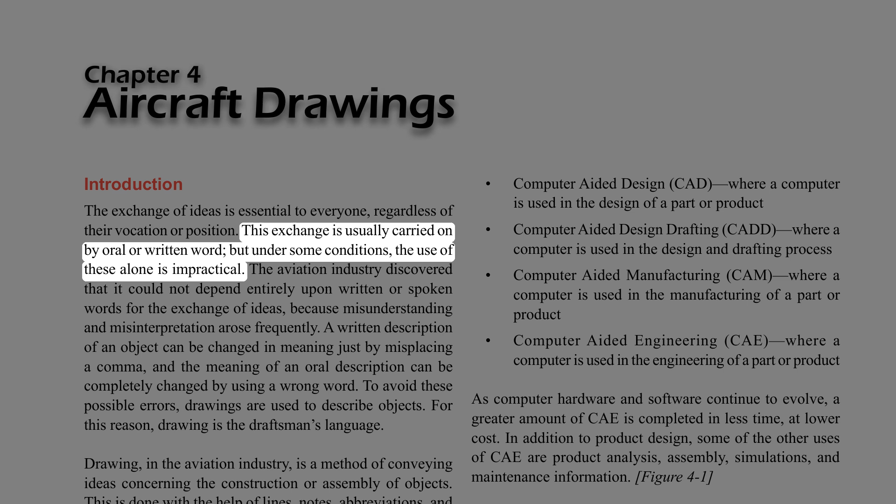Chapter 4: Aircraft Drawings. Introduction. The exchange of ideas is essential to everyone, regardless of their vocation or position. This exchange is usually carried on by oral or written word, but under some conditions, the use of these alone is impractical. The aviation industry discovered that it could not depend entirely upon written or spoken words for the exchange of ideas, because misunderstanding and misinterpretation arose frequently.

A written description of an object can be changed in meaning just by misplacing a comma, and the meaning of an oral description can be completely changed by using a wrong word. To avoid these possible errors, drawings are used to describe objects. For this reason, drawing is the draftsman's language.

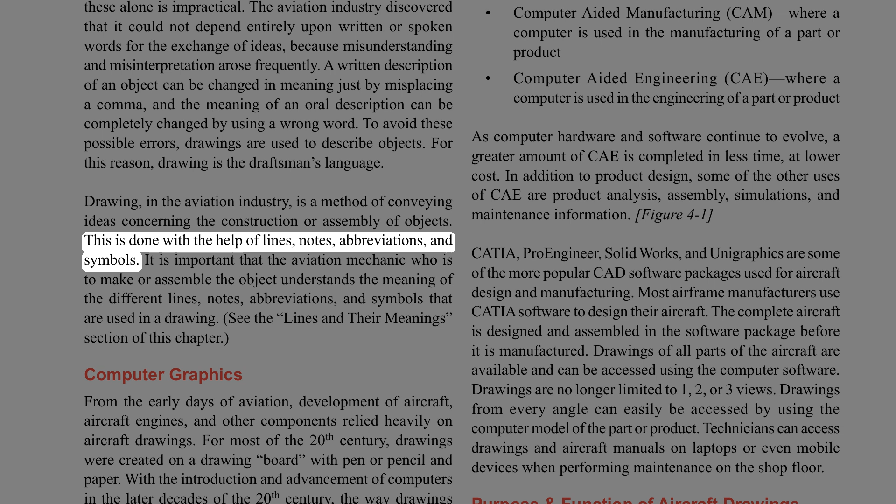Drawing, in the aviation industry, is a method of conveying ideas concerning the construction or assembly of objects. This is done with the help of lines, notes, abbreviations, and symbols. It is important that the aviation mechanic who is to make or assemble the object understands the meaning of the different lines, notes, abbreviations, and symbols that are used in a drawing. See the lines and their meanings section of this chapter.

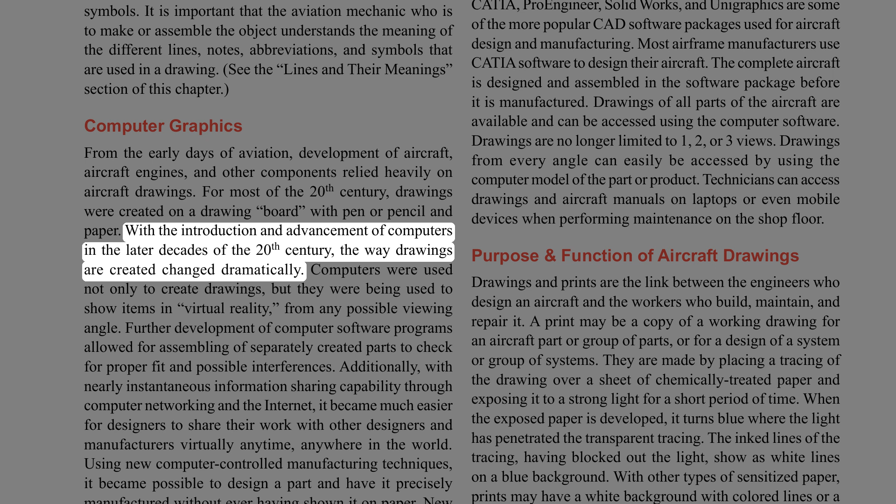Computer graphics. From the early days of aviation, development of aircraft, engines, and other components relied heavily on aircraft drawings. For most of the 20th century, drawings were created on a drawing board with pen or pencil and paper. With the introduction and advancement of computers in the later decades of the 20th century, the way drawings are created changed dramatically. Computers were used not only to create drawings, but they were being used to show items in virtual reality from any possible viewing angle.

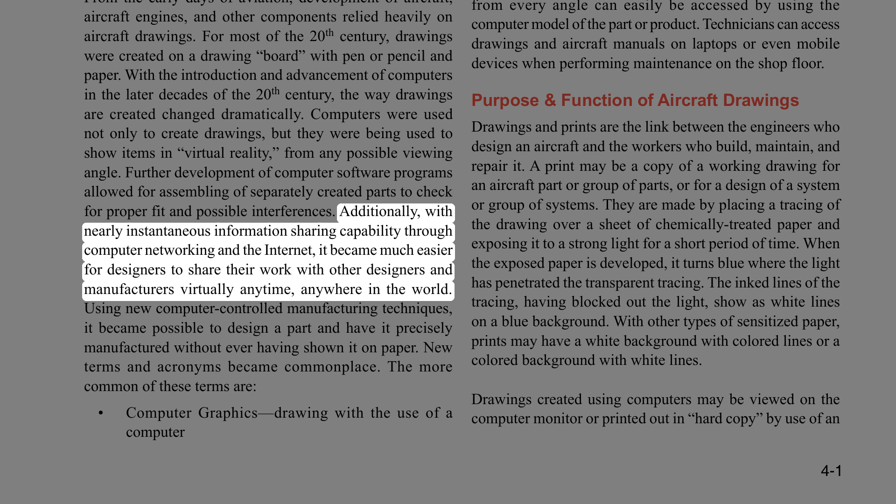Further development of computer software programs allowed for assembling of separately created parts to check for proper fit and possible interferences. Additionally, with nearly instantaneous information sharing capability through computer networking and the internet, it became much easier for designers to share their work with other designers and manufacturers virtually anytime, anywhere in the world. Using new computer-controlled manufacturing techniques, it became possible to design a part and have it precisely manufactured without ever having shown it on paper. New terms and acronyms became commonplace.

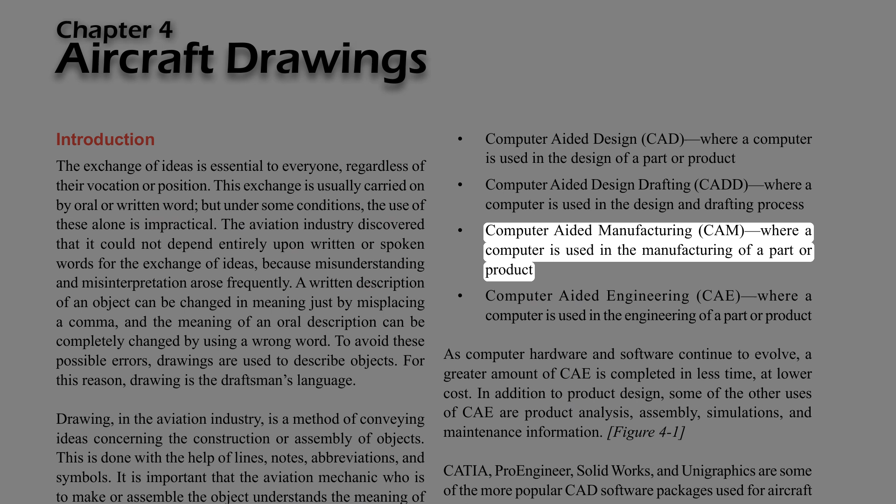The more common of these terms are computer graphics, drawing with the use of a computer; computer-aided design, CAD, where a computer is used in the design of a part or product; computer-aided design drafting, CADD, where a computer is used in the design and drafting process; computer-aided manufacturing, CAM, where a computer is used in the manufacturing of a part or product; computer-aided engineering, CAE, where a computer is used in the engineering of a part or product.

As computer hardware and software continue to evolve, a greater amount of CAE is completed in less time, at lower cost. In addition to product design, some of the other uses of CAE are product analysis, assembly, simulations, and maintenance information. CATIA, Pro Engineer, SolidWorks, and Unigraphics are some of the more popular CAD software packages used for aircraft design and manufacturing. Most airframe manufacturers use CATIA software to design their aircraft. The complete aircraft is designed and assembled in the software package before it is manufactured.

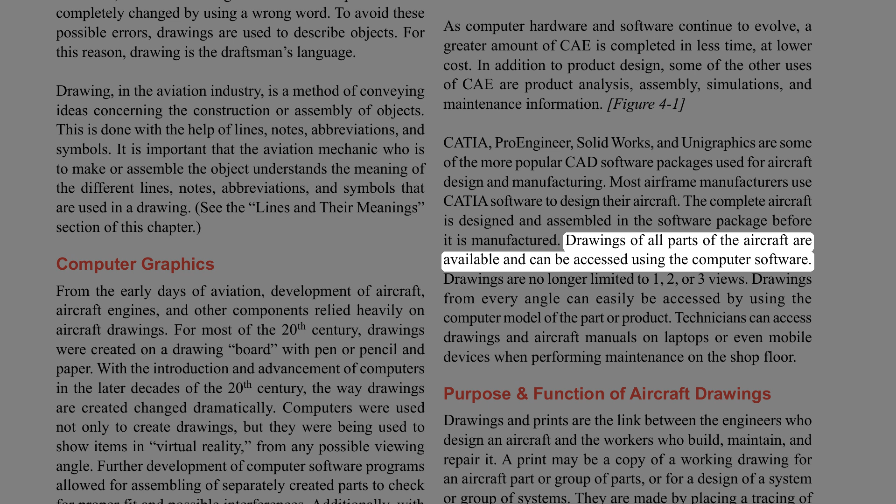Drawings of all parts of the aircraft are available and can be accessed using the computer software. Drawings are no longer limited to 1, 2, or 3 views. Drawings from every angle can easily be accessed by using the computer model of the part or product. Technicians can access drawings and aircraft manuals on laptops or even mobile devices when performing maintenance on the shop floor.

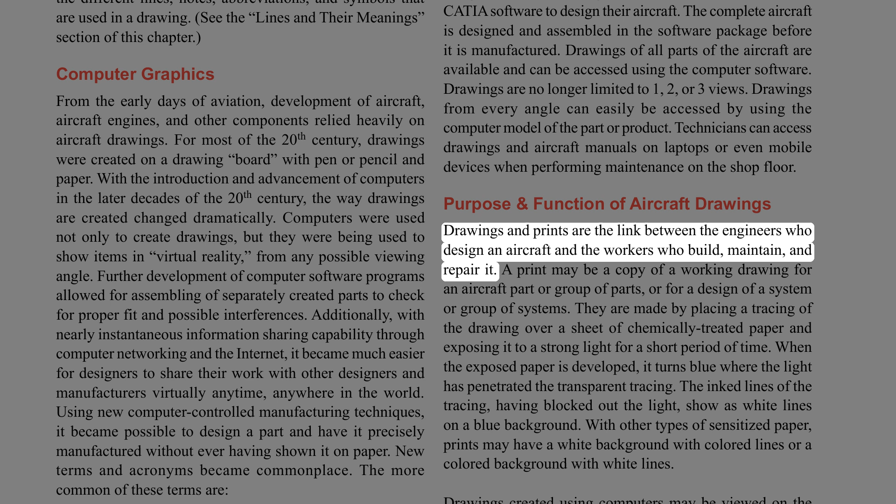Purpose and function of aircraft drawings. Drawings and prints are the link between the engineers who design an aircraft and the workers who build, maintain, and repair it. A print may be a copy of a working drawing for an aircraft part or group of parts, or for a design of a system or group of systems. They are made by placing a tracing of the drawing over a sheet of chemically treated paper and exposing it to a strong light for a short period of time.

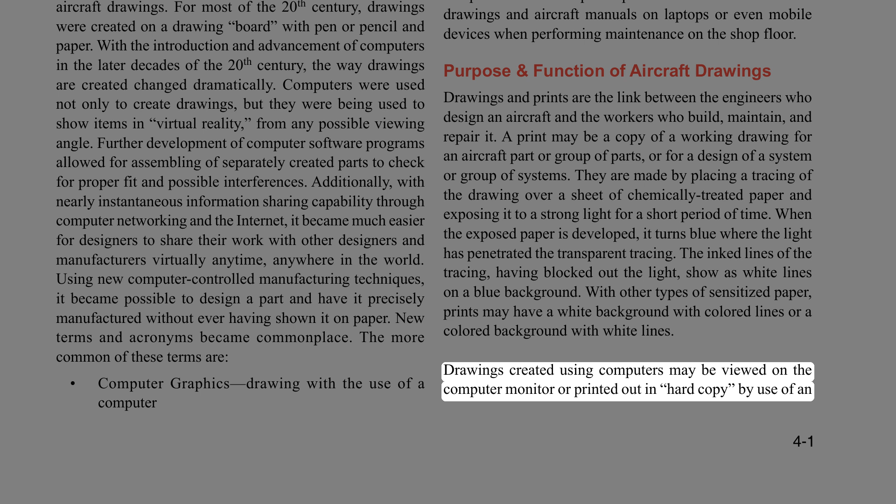When the exposed paper is developed, it turns blue where the light has penetrated the transparent tracing. The inked lines of the tracing, having blocked out the light, show as white lines on a blue background. With other types of sensitized paper, prints may have a white background with colored lines or a colored background with white lines. Drawings created using computers may be viewed on the computer monitor or printed out in hard copy by use of an inkjet or laser printer.

Larger drawings may be printed by use of a plotter or large format printer. Large printers can print drawings up to 42 inches high with widths up to 600 inches by use of continuous roll paper. Care and use of drawings. Drawings should be handled carefully as they are both expensive and valuable. Open drawings slowly and carefully to prevent tearing of the paper. When the drawing is open, smooth out the fold lines instead of bending them backward.

To protect drawings from damage, never spread them on the floor or lay them on a surface covered with tools or other objects that may make holes in the paper. Hands should be free of oil, grease, or other unclean matter that can soil or smudge the print. Never make notes or marks on a print, as they may confuse others and lead to incorrect work.

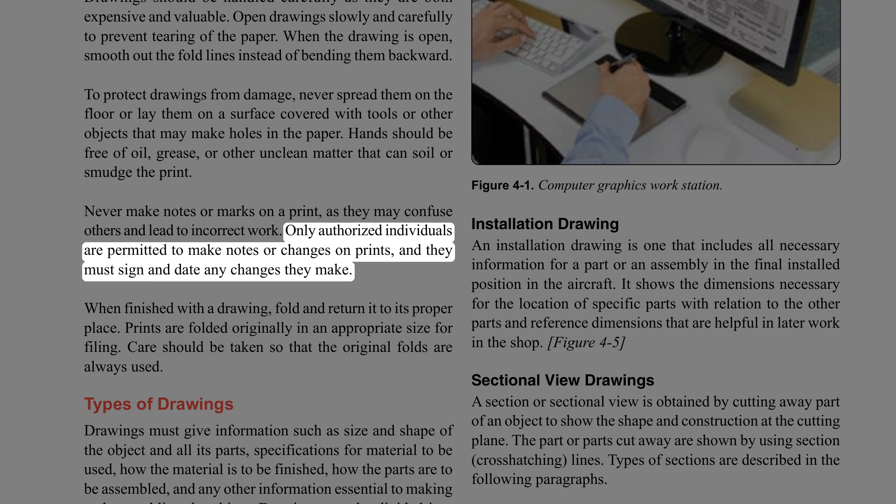Only authorized individuals are permitted to make notes or changes on prints, and they must sign and date any changes they make. When finished with a drawing, fold and return it to its proper place. Prints are folded originally in an appropriate size for filing. Care should be taken so that the original folds are always used.

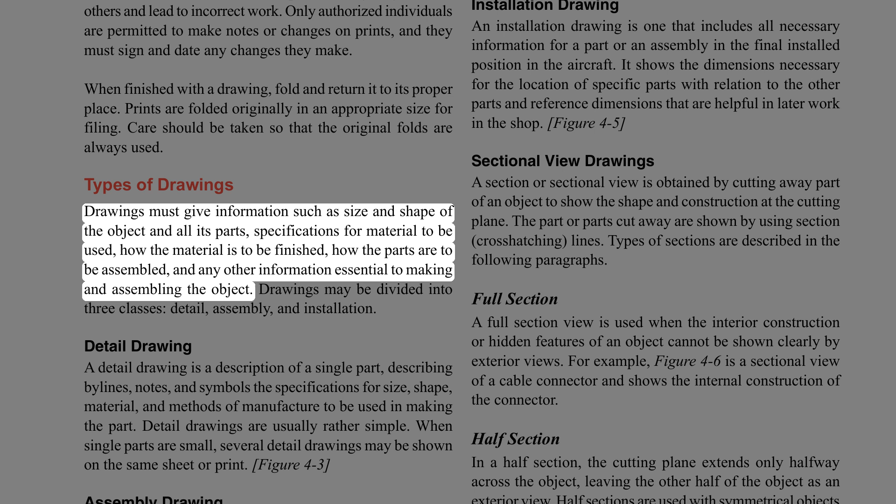Types of drawings. Drawings must give information such as size and shape of the object and all its parts, specifications for material to be used, how the material is to be finished, how the parts are to be assembled, and any other information essential to making and assembling the object. Drawings may be divided into 3 classes: detail, assembly, and installation.

Detail drawing. A detail drawing is a description of a single part, describing by lines, notes, and symbols the specifications for size, shape, material, and methods of manufacture to be used in making the part. Detail drawings are usually rather simple. When single parts are small, several detail drawings may be shown on the same sheet or print.

Assembly drawing. An assembly drawing is a description of an object made up of 2 or more parts. It describes the object's size and shape. Its primary purpose is to show the relationship of the various parts. An assembly drawing is usually more complex than a detail drawing and is often accompanied by detail drawings of various parts.

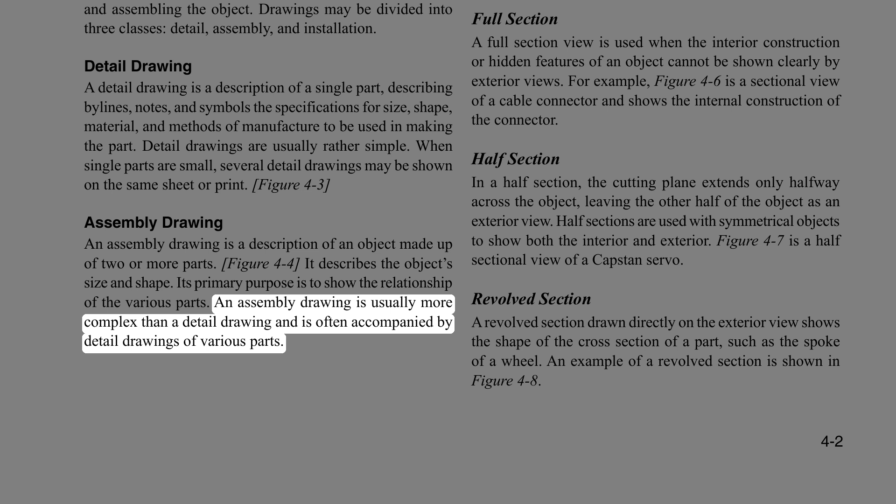Installation drawing. An installation drawing is one that includes all necessary information for a part or an assembly in the final installed position in the aircraft. It shows the dimensions necessary for the location of specific parts with relation to the other parts and reference dimensions that are helpful in later work in the shop.

Sectional view drawings. A section or sectional view is obtained by cutting away part of an object to show the shape and construction at the cutting plane. The part or parts cut away are shown by using section (crosshatching) lines. Types of sections are described in the following paragraphs.

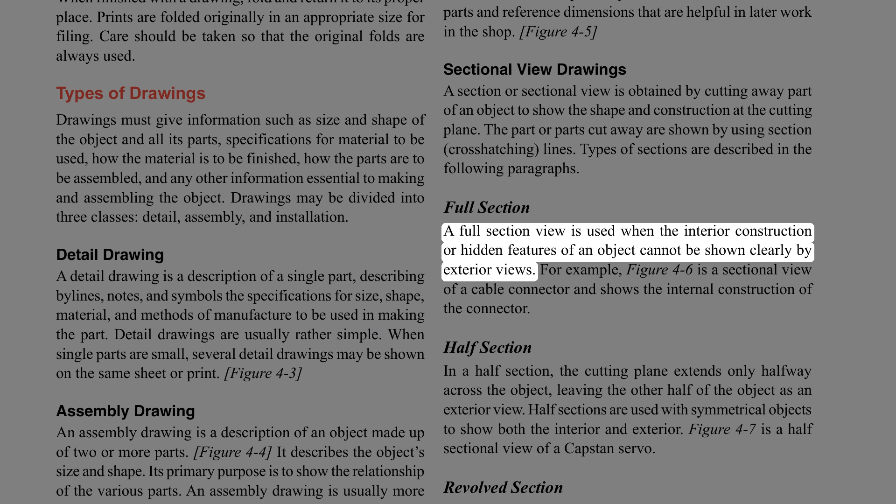Full section. A full section view is used when the interior construction or hidden features of an object cannot be shown clearly by exterior views. For example, Figure 4-6 is a sectional view of a cable connector and shows the internal construction of the connector.

Half section. In a half section, the cutting plane extends only halfway across the object, leaving the other half of the object as an exterior view. Half sections are used with symmetrical objects to show both the interior and exterior. Figure 4-7 is a half-sectional view of a capstan servo.

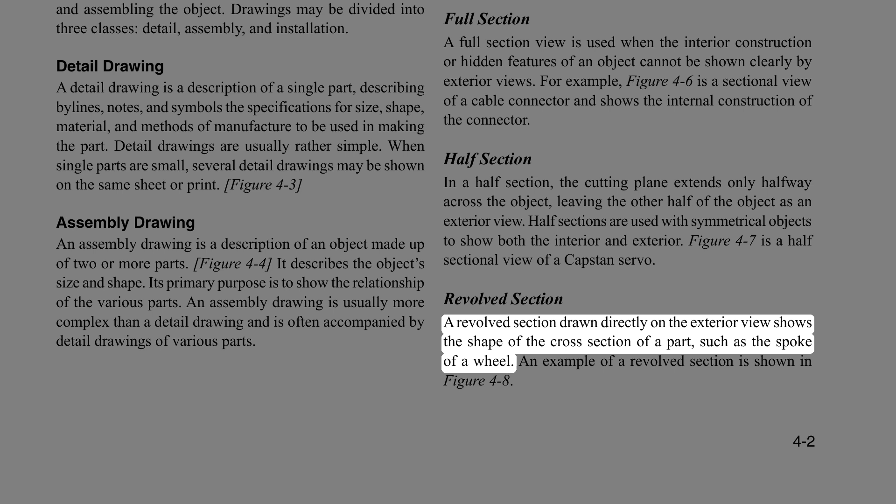Revolved section. A revolved section drawn directly on the exterior view shows the shape of the cross-section of a part, such as the spoke of a wheel. An example of a revolved section is shown in Figure 4-8. Removed section. A removed section illustrates parts of an object. It is drawn like revolved sections, except it is placed at one side and often drawn to a larger scale than the view indicated to bring out pertinent details.

Figure 4-9 is an illustration of removed sections. Section AA shows the cross-sectional shape of the object at cutting plane line AA. Section BB shows the cross-sectional shape at cutting plane line BB. These sectional views are drawn to the same scale as the principal view.

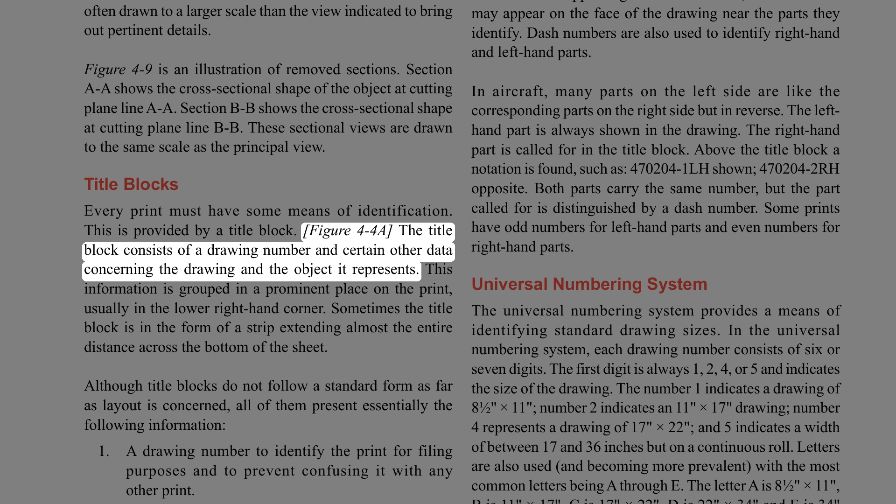Title blocks. Every print must have some means of identification. This is provided by a title block, Figure 4-4A. The title block consists of a drawing number and certain other data concerning the drawing and the object it represents. This information is grouped in a prominent place on the print, usually in the lower right-hand corner.

Sometimes the title block is in the form of a strip extending almost the entire distance across the bottom of the sheet. Although title blocks do not follow a standard form as far as layout is concerned, all of them present essentially the following information. A drawing number to identify the print for filing purposes and to prevent confusing it with any other print. The name of the part or assembly. The drawing scale. The date. The name of the firm. The name of the draftsman, the checker, and the person approving the drawing.

Drawing or print numbers. All prints are identified by a number that appears in a number block in the lower right corner of the title block. It may also be shown in other places, such as near the top borderline, in the upper right corner, or on the reverse side of the print at both ends, so that the number shows when the print is folded or rolled. The purpose of the number is quick identification of a print.

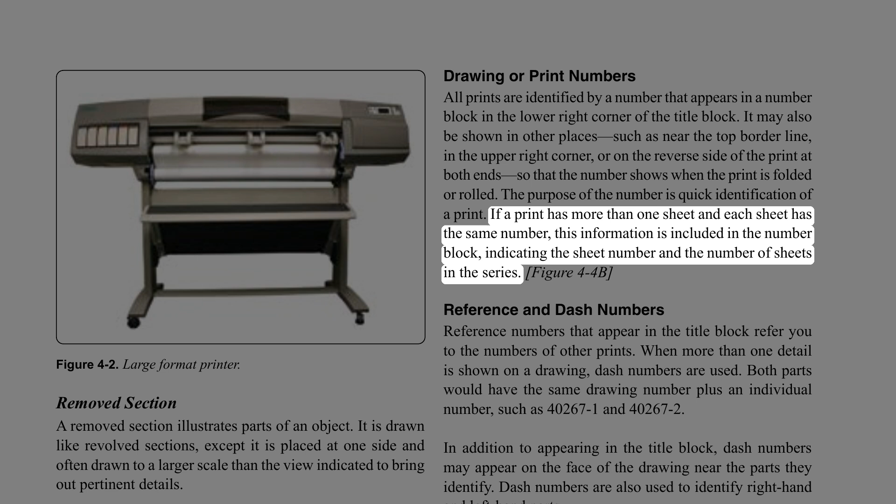If a print has more than one sheet and each sheet has the same number, this information is included in the number block, indicating the sheet number and the number of sheets in the series, Figure 4-4B. Reference and dash numbers. Reference numbers that appear in the title block refer you to the numbers of other prints. When more than one detail is shown on a drawing, dash numbers are used.

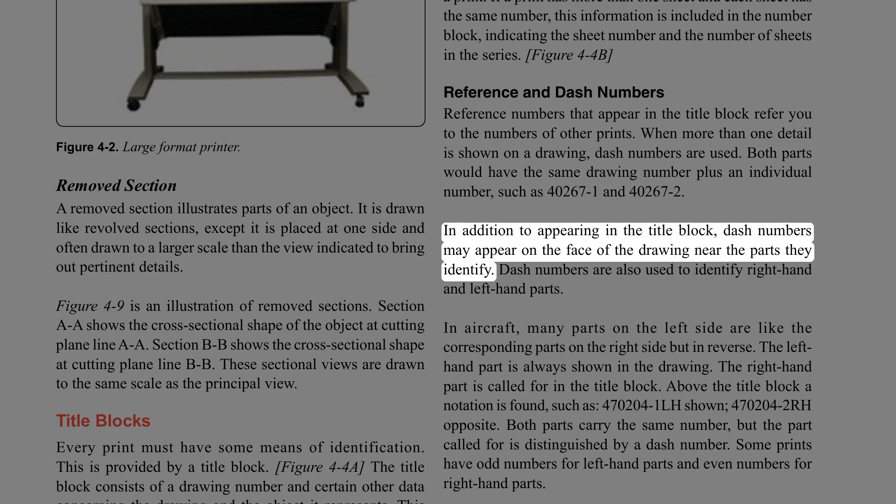Both parts would have the same drawing number plus an individual number, such as 40,267-1 and 40,267-2. In addition to appearing in the title block, dash numbers may appear on the face of the drawing near the parts they identify. Dash numbers are also used to identify right-hand and left-hand parts.

In aircraft, many parts on the left side are like the corresponding parts on the right side but in reverse. The left-hand part is always shown in the drawing. The right-hand part is called for in the title block. Above the title block a notation is found, such as 470,204-1 LH shown, 470,204-2 RH opposite. Both parts carry the same number, but the part called for is distinguished by a dash number. Some prints have odd numbers for left-hand parts and even numbers for right-hand parts.

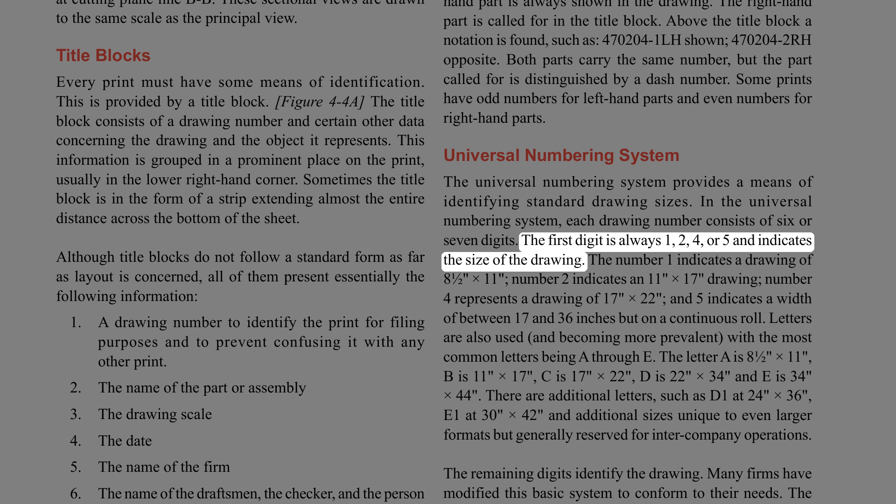Universal Numbering System. The Universal Numbering System provides a means of identifying standard drawing sizes. In the Universal Numbering System, each drawing number consists of 6 or 7 digits. The first digit is always 1, 2, 4, or 5 and indicates the size of the drawing. The number 1 indicates a drawing of 8.5 by 11 inches. Number 2 indicates an 11 by 17 inch drawing. Number 4 represents a drawing of 17 by 22 inches, and 5 indicates a width of between 17 and 36 inches but on a continuous roll.

Letters are also used, and becoming more prevalent, with the most common letters being A through E. The letter A is 8.5 by 11, B is 11 by 17 inches, C is 17 by 22 inches, D is 22 by 34, and E is 34 by 44. There are additional letters, such as D1 at 24 by 36 inches, E1 at 30 by 42 inches, and additional sizes unique to even larger formats but generally reserved for intercompany operations. The remaining digits identify the drawing.

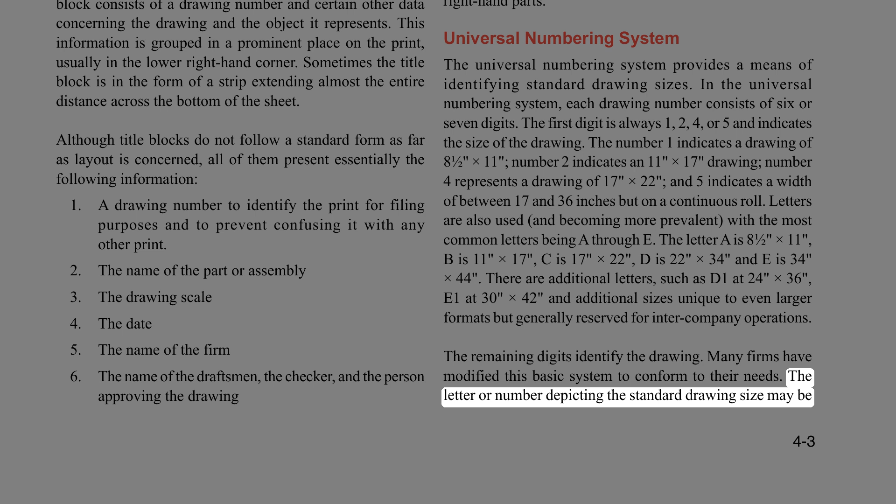Many firms have modified this basic system to conform to their needs. The letter or number depicting the standard drawing size may be prefixed to the number, separated from it by a dash (Figure 4-3, Detail Drawing; Figure 4-4, Assembly Drawing; Figure 4-5, Installation Drawing). Other numbering systems provide a separate box preceding the drawing number for the drawing size identifier. In another modification of this system, the part number of the depicted assembly is assigned as the drawing number.

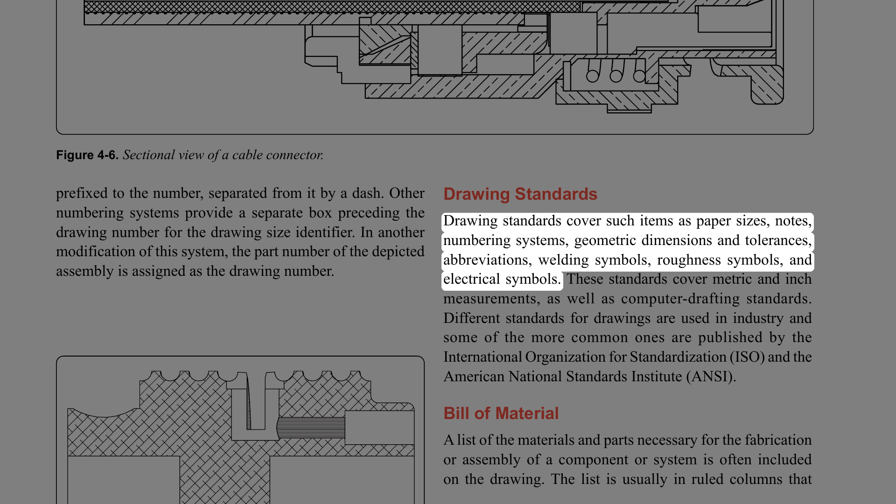Drawing standards. Drawing standards cover such items as paper sizes, notes, numbering systems, geometric dimensions and tolerances, abbreviations, welding symbols, roughness symbols, and electrical symbols. These standards cover metric and inch measurements, as well as computer drafting standards. Different standards for drawings are used in industry, and some of the more common ones are published by the International Organization for Standardization, ISO, and the American National Standards Institute, ANSI.

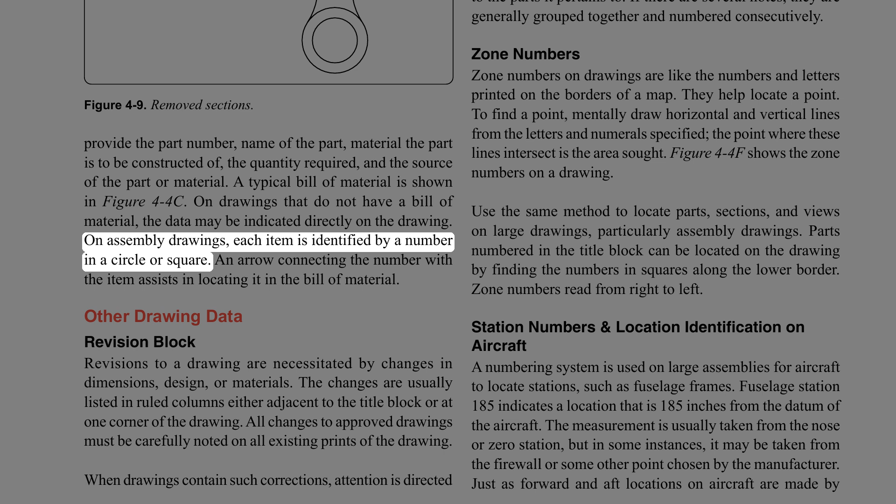Bill of Material. A list of the materials and parts necessary for the fabrication or assembly of a component or system is often included on the drawing. The list is usually in ruled columns that provide the part number, name of the part, material the part is to be constructed of, the quantity required, and the source of the part or material. A typical bill of material is shown in Figure 4-4c. On drawings that do not have a bill of material, the data may be indicated directly on the drawing. On assembly drawings, each item is identified by a number in a circle or square. An arrow connecting the number with the item assists in locating it in the bill of material.

Other drawing data: revision block. Revisions to a drawing are necessitated by changes in dimensions, design, or materials. The changes are usually listed in ruled columns either adjacent to the title block or at one corner of the drawing. All changes to approved drawings must be carefully noted on all existing prints of the drawing. When drawings contain such corrections, attention is directed to the changes by lettering or numbering them and listing those changes against the symbol in a revision block.

Figure 4-4d. The revision block contains the identification symbol, the date, the nature of the revision, the authority for the change, and the name of the draftsman who made the change. To distinguish the corrected drawing from its previous version, many firms are including, as part of the title block, a space for entering the appropriate symbol to designate that the drawing has been changed or revised.

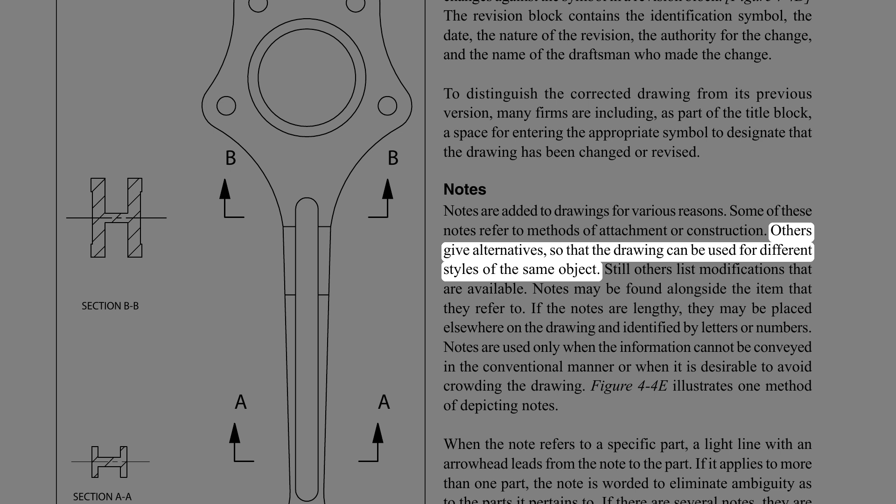Notes. Notes are added to drawings for various reasons. Some of these notes refer to methods of attachment or construction. Others give alternatives, so that the drawing can be used for different styles of the same object. Still others list modifications that are available. Notes may be found alongside the item that they refer to. If the notes are lengthy, they may be placed elsewhere on the drawing and identified by letters or numbers.

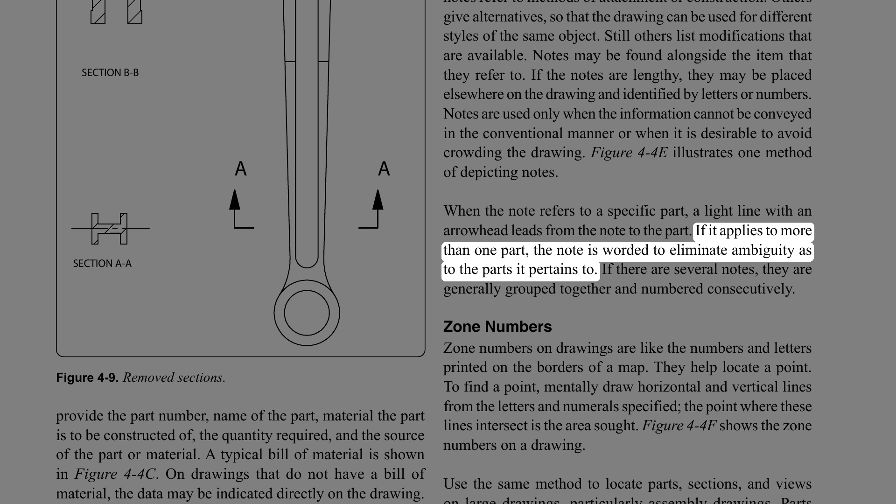Notes are used only when the information cannot be conveyed in the conventional manner or when it is desirable to avoid crowding the drawing. Figure 4-4e illustrates one method of depicting notes. When the note refers to a specific part, a light line with an arrowhead leads from the note to the part. If it applies to more than one part, the note is worded to eliminate ambiguity as to the parts it pertains to. If there are several notes, they are generally grouped together and numbered consecutively.

Zone numbers. Zone numbers on drawings are like the numbers and letters printed on the borders of a map. They help locate a point. To find a point, mentally draw horizontal and vertical lines from the letters and numerals specified. The point where these lines intersect is the area sought. Figure 4-4f shows the zone numbers on a drawing.

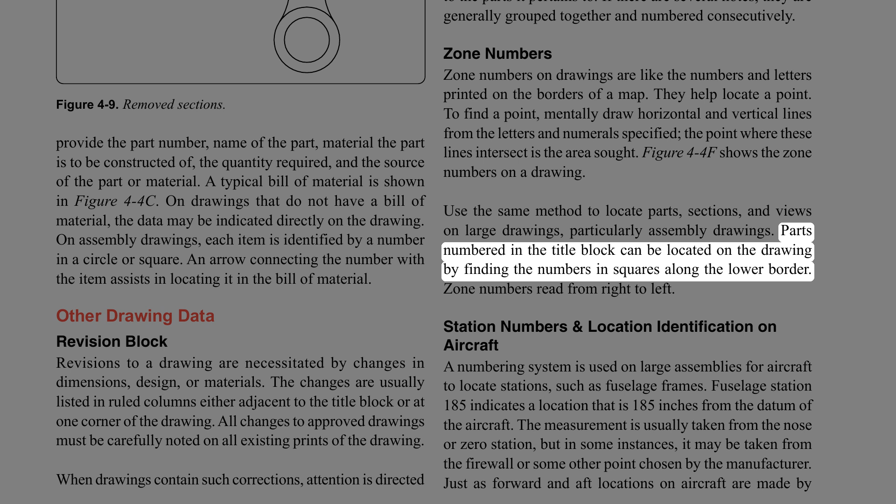Use the same method to locate parts, sections, and views on large drawings, particularly assembly drawings. Parts numbered in the title block can be located on the drawing by finding the numbers in squares along the lower border. Zone numbers read from right to left.

Station numbers and location identification on aircraft. A numbering system is used on large assemblies for aircraft to locate stations, such as fuselage frames. Fuselage station 185 indicates a location that is 185 inches from the datum of the aircraft. The measurement is usually taken from the nose or zero station, but in some instances, it may be taken from the firewall or some other point chosen by the manufacturer.

Just as forward and aft locations on aircraft are made by reference to the datum, locations left and right of the aircraft's longitudinal axis are made by reference to the buttock line and are called butt stations. Vertical locations on aircraft are made in reference to the waterline. The same station numbering system is used for wing and stabilizer frames. The measurement is taken from the centerline or zero station of the aircraft. Figure 4-10 shows use of the fuselage stations, FS, waterline locations, WL, and left and right buttock line locations, RBL and LBL.

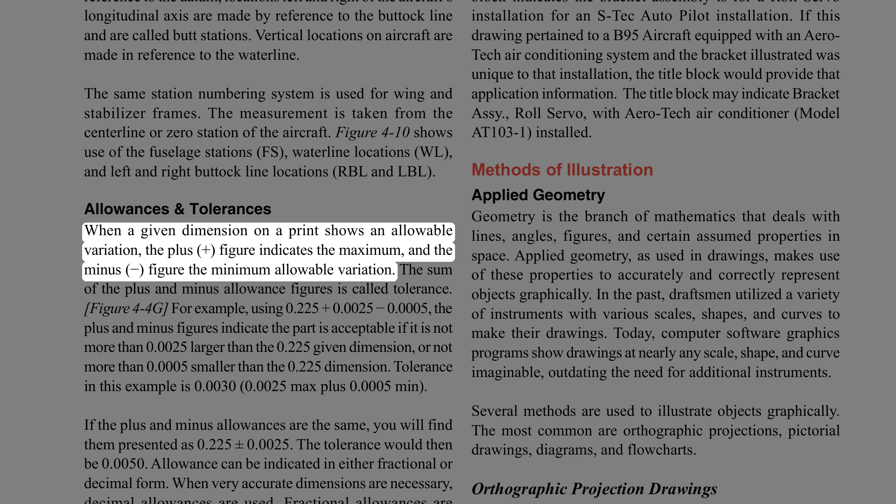Allowances and tolerances. When a given dimension on a print shows an allowable variation, the plus figure indicates the maximum, and the minus figure the minimum allowable variation. The sum of the plus and minus allowance figures is called tolerance.

In Figure 4-4g, for example, using 0.225 plus 0.0025 minus 0.0005, the plus and minus figures indicate the part is acceptable if it is not more than 0.0025 larger than the 0.225 given dimension, or not more than 0.0005 smaller than the 0.225 dimension. Tolerance in this example is 0.0030, 0.0025 max plus 0.0005 min.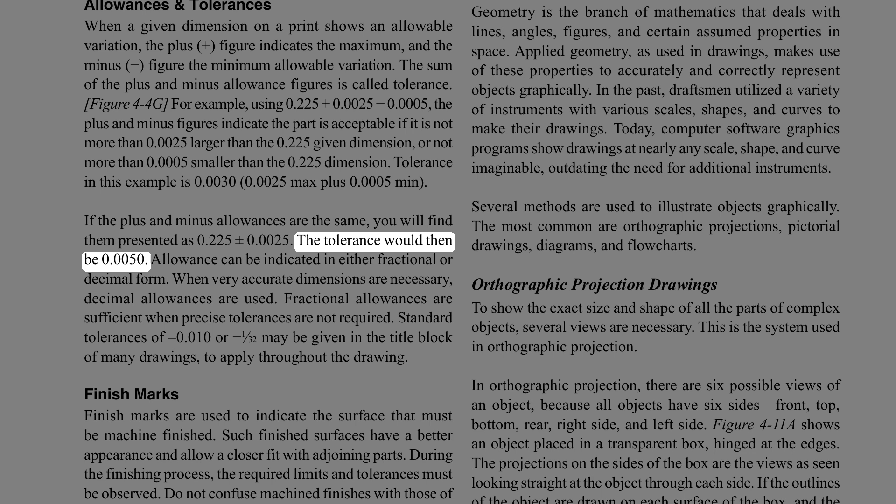If the plus and minus allowances are the same, you will find them presented as 0.225 plus or minus 0.0025. The tolerance would then be 0.0050. Allowance can be indicated in either fractional or decimal form. When very accurate dimensions are necessary, decimal allowances are used. Fractional allowances are sufficient when precise tolerances are not required. Standard tolerances of minus 0.010 or minus 1/32 may be given in the title block of many drawings, to apply throughout the drawing.

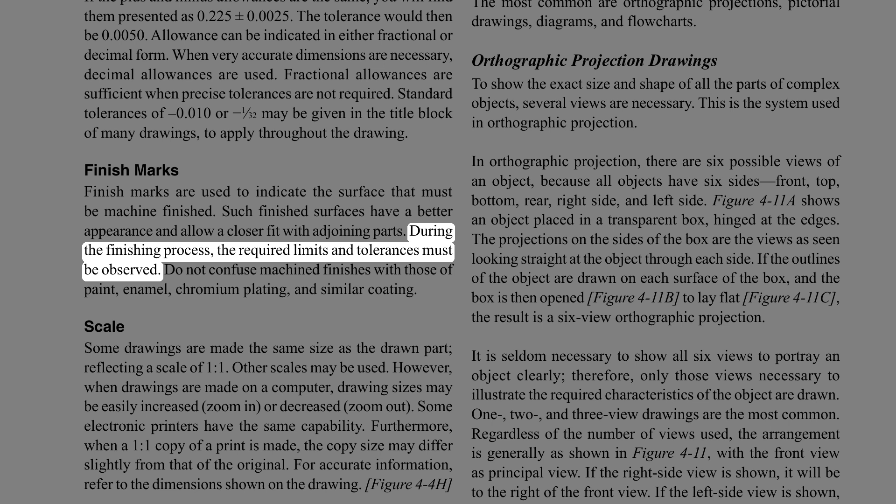Finish marks. Finish marks are used to indicate the surface that must be machine finished. Such finished surfaces have a better appearance and allow a closer fit with adjoining parts. During the finishing process, the required limits and tolerances must be observed. Do not confuse machined finishes with those of paint, enamel, chromium plating, and similar coating.

Scale. Some drawings are made the same size as the drawn part, reflecting a scale of 1:1. Other scales may be used. However, when drawings are made on a computer, drawing sizes may be easily increased, zoom in, or decreased, zoom out. Some electronic printers have the same capability. Furthermore, when a 1:1 copy of a print is made, the copy size may differ slightly from that of the original. For accurate information, refer to the dimensions shown on the drawing.

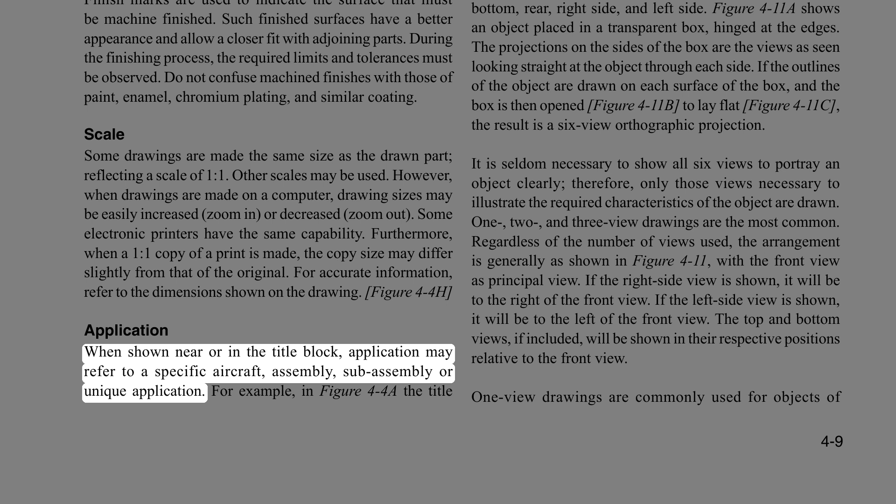Figure 4-4h. Application. When shown near or in the title block, application may refer to a specific aircraft, assembly, sub-assembly, or unique application. For example, in Figure 4-4a, the title block indicates the bracket assembly is for roll servo installation for an S-Tec autopilot installation.

If this drawing pertained to a B-95 aircraft equipped with an Aero-Tech air conditioning system and the bracket illustrated was unique to that installation, the title block would provide that application information. The title block may indicate bracket Assy., roll servo, with Aero-Tech air conditioner, model AT103-1, installed.

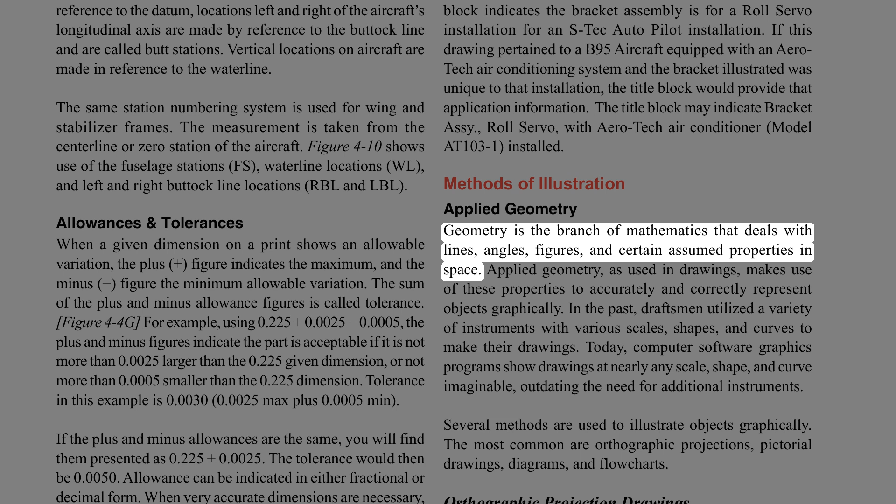Methods of illustration. Applied geometry. Geometry is the branch of mathematics that deals with lines, angles, figures, and certain assumed properties in space. Applied geometry, as used in drawings, makes use of these properties to accurately and correctly represent objects graphically.

In the past, draftsmen utilized a variety of instruments with various scales, shapes, and curves to make their drawings. Today, computer software graphics programs show drawings at nearly any scale, shape, and curve imaginable, outdating the need for additional instruments. Several methods are used to illustrate objects graphically. The most common are orthographic projections, pictorial drawings, diagrams, and flowcharts.

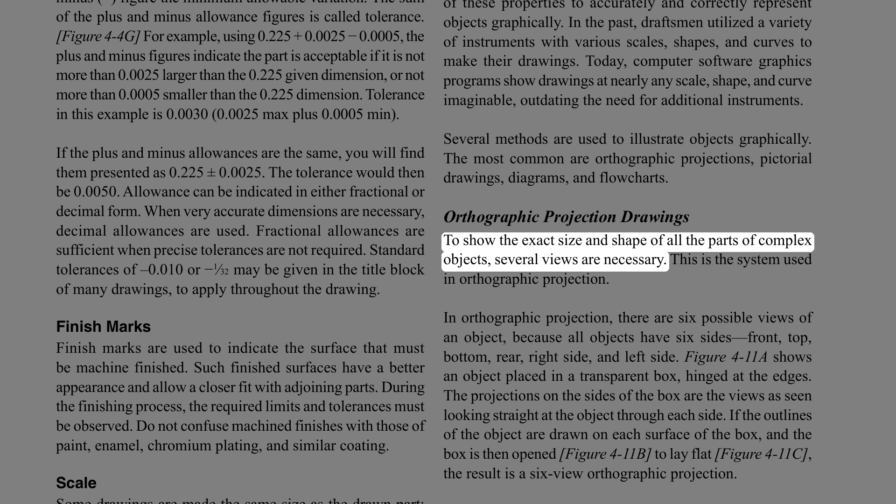Orthographic projection drawings. To show the exact size and shape of all the parts of complex objects, several views are necessary. This is the system used in orthographic projection. In orthographic projection, there are 6 possible views of an object, because all objects have 6 sides: front, top, bottom, rear, right side, and left side.

Figure 4-11a shows an object placed in a transparent box, hinged at the edges. The projections on the sides of the box are the views as seen looking straight at the object through each side. If the outlines of the object are drawn on each surface of the box, and the box is then opened, figure 4-11b, to lay flat, figure 4-11c, the result is a 6-view orthographic projection.

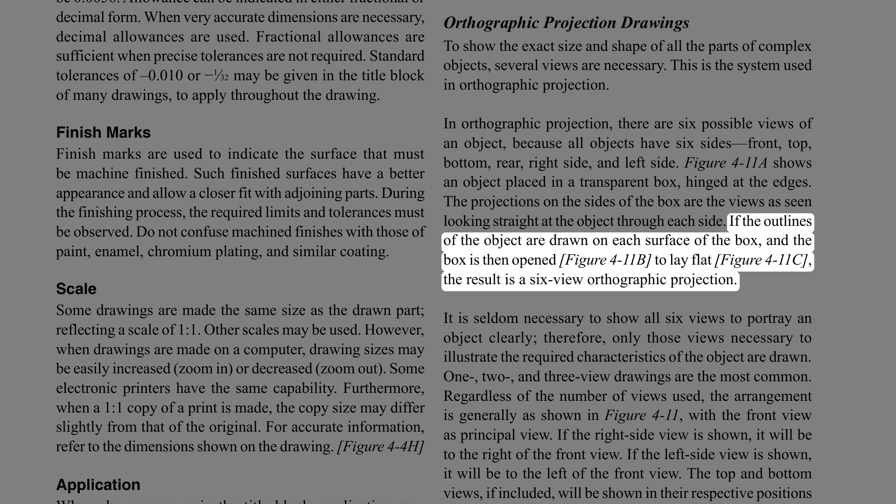It is seldom necessary to show all 6 views to portray an object clearly. Therefore, only those views necessary to illustrate the required characteristics of the object are drawn. 1, 2, and 3 view drawings are the most common. Regardless of the number of views used, the arrangement is generally as shown in figure 4-11, with the front view as principal view.

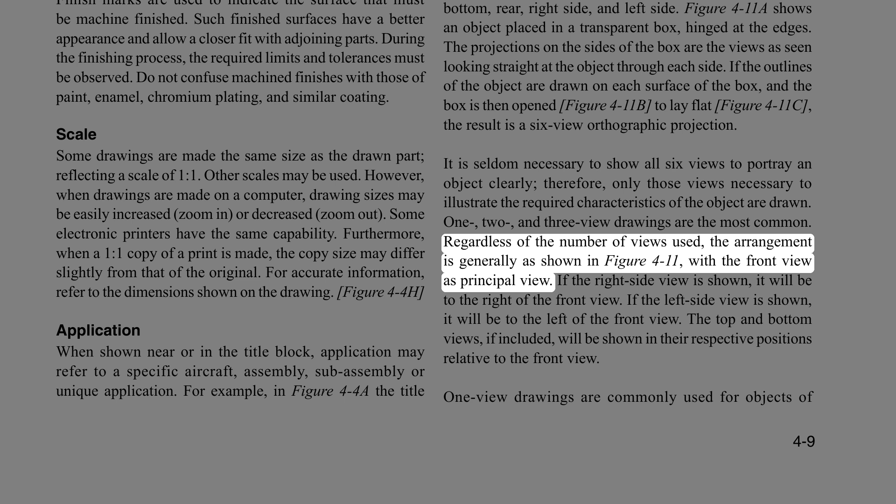If the right side view is shown, it will be to the right of the front view. If the left side view is shown, it will be to the left of the front view. The top and bottom views, if included, will be shown in their respective positions relative to the front view.

One-view drawings are commonly used for objects of uniform thickness, such as gaskets, shims, and plates. A dimensional note gives the thickness as shown in figure 4-12. One-view drawings are also commonly used for cylindrical, spherical, or square parts if all the necessary dimensions can be properly shown in one view. When space is limited and 2 views must be shown, symmetrical objects are often represented by half views, as illustrated in figure 4-13.

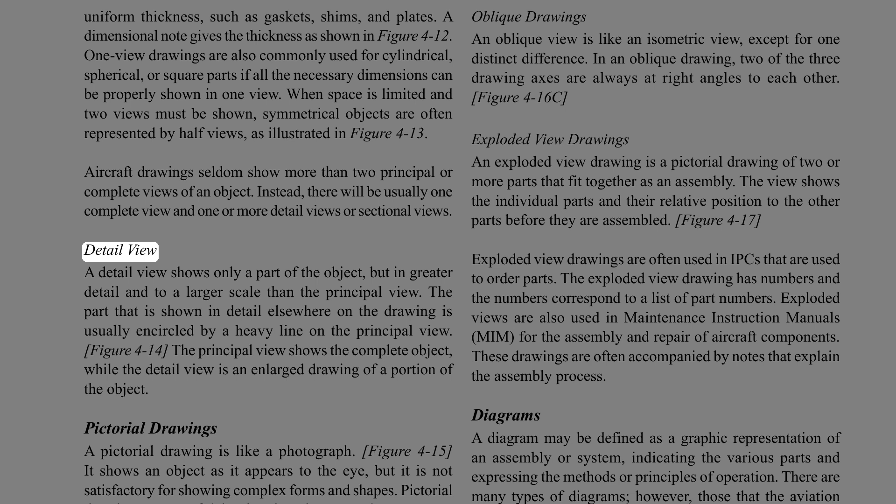Aircraft drawings seldom show more than 2 principal or complete views of an object. Instead, there will be usually one complete view and one or more detail views or sectional views. Detail view. A detail view shows only a part of the object, but in greater detail and to a larger scale than the principal view. The part that is shown in detail elsewhere on the drawing is usually encircled by a heavy line on the principal view. The principal view shows the complete object, while the detail view is an enlarged drawing of a portion of the object.

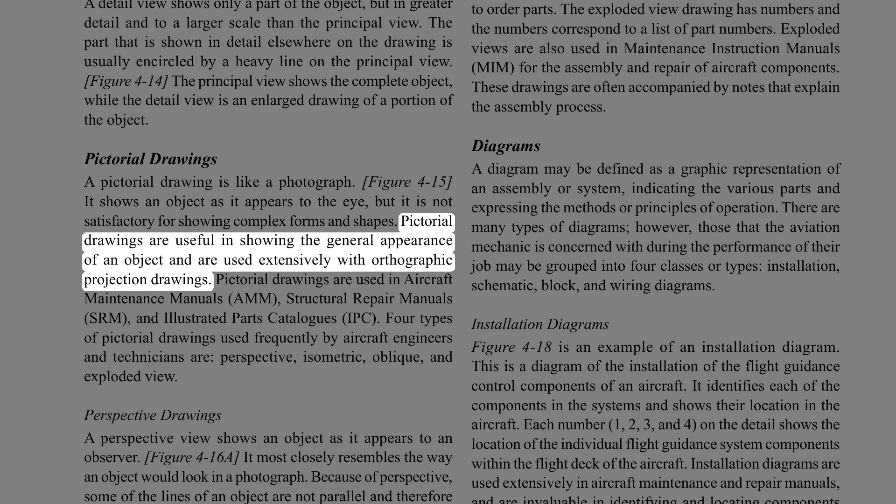Pictorial drawings. A pictorial drawing is like a photograph. It shows an object as it appears to the eye, but it is not satisfactory for showing complex forms and shapes. Pictorial drawings are useful in showing the general appearance of an object and are used extensively with orthographic projection drawings. Pictorial drawings are used in aircraft maintenance manuals (AMM), structural repair manuals (SRM), and illustrated parts catalogs (IPC). 4 types of pictorial drawings used frequently by aircraft engineers and technicians are perspective, isometric, oblique, and exploded view.

Perspective drawings. A perspective view shows an object as it appears to an observer, figure 4-16a. It most closely resembles the way an object would look in a photograph. Because of perspective, some of the lines of an object are not parallel and therefore the actual angles and dimensions are not accurate.

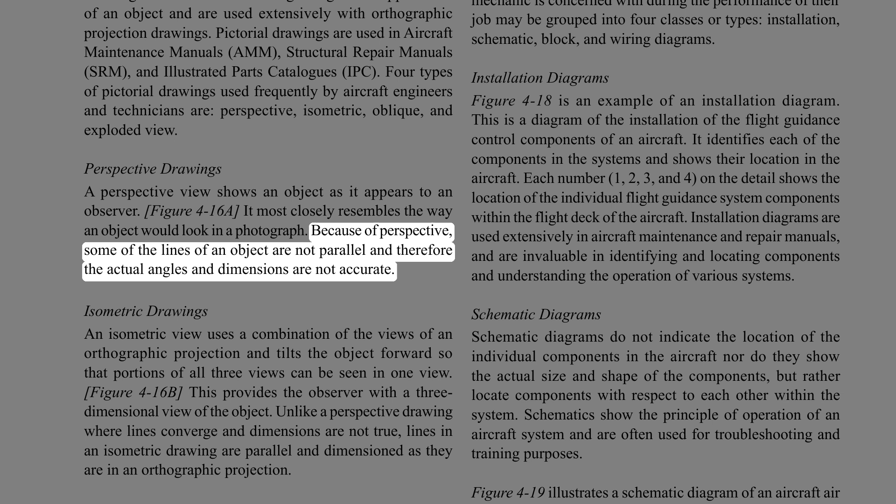Isometric drawings. An isometric view uses a combination of the views of an orthographic projection and tilts the object forward so that portions of all 3 views can be seen in one view, figure 4-16b. This provides the observer with a 3-dimensional view of the object. Unlike a perspective drawing where lines converge and dimensions are not true, lines in an isometric drawing are parallel and dimensioned as they are in an orthographic projection.

Oblique drawings. An oblique view is like an isometric view, except for one distinct difference. In an oblique drawing, 2 of the 3 drawing axes are always at right angles to each other, figure 4-16c.

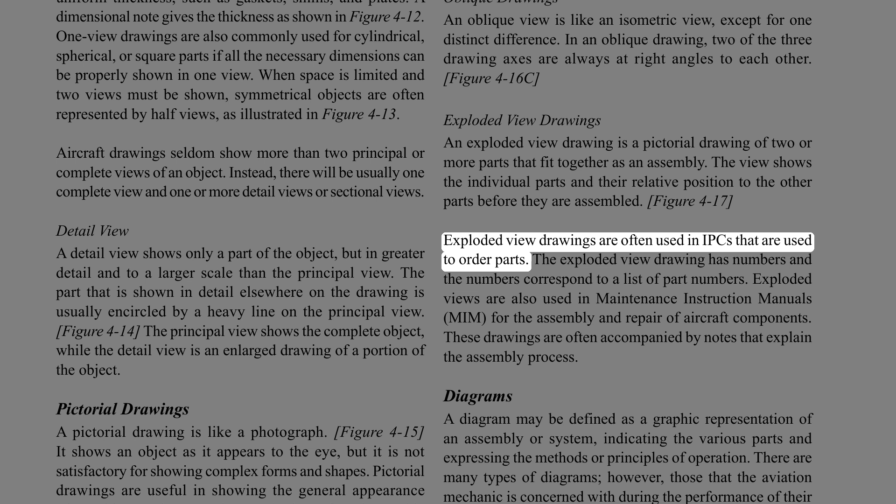Exploded view drawings. An exploded view drawing is a pictorial drawing of 2 or more parts that fit together as an assembly. The view shows the individual parts and their relative position to the other parts before they are assembled. Exploded view drawings are often used in IPCs that are used to order parts. The exploded view drawing has numbers and the numbers correspond to a list of part numbers. Exploded views are also used in maintenance instruction manuals (MIM) for the assembly and repair of aircraft components.

These drawings are often accompanied by notes that explain the assembly process. Diagrams. A diagram may be defined as a graphic representation of an assembly or system, indicating the various parts and expressing the methods or principles of operation. There are many types of diagrams; however, those that the aviation mechanic is concerned with during the performance of their job may be grouped into 4 classes or types: installation, schematic, block, and wiring diagrams.

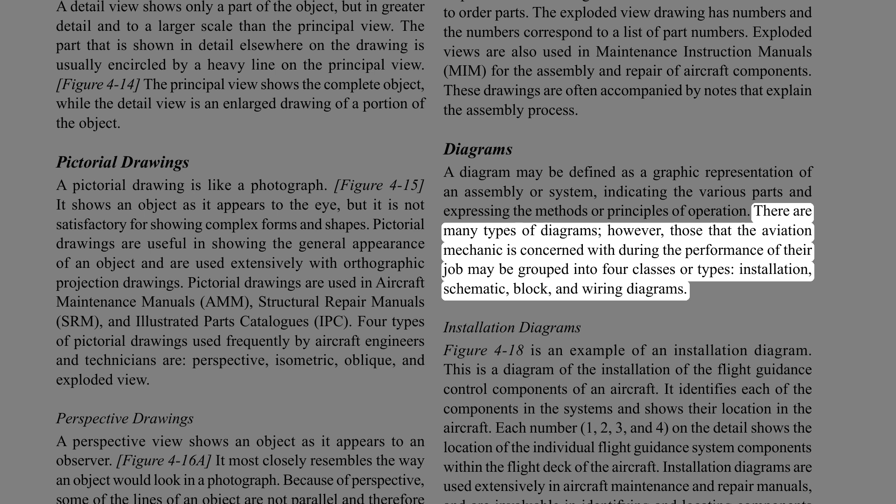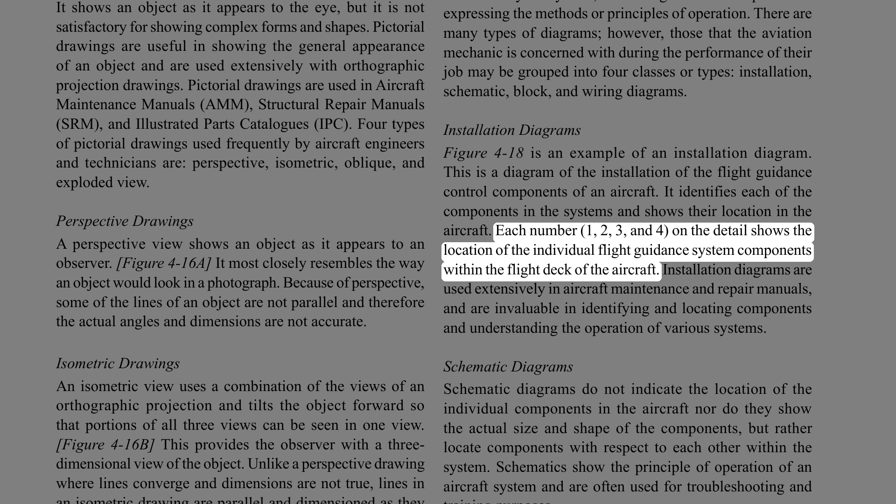Installation diagrams. Figure 4-18 is an example of an installation diagram. This is a diagram of the installation of the flight guidance control components of an aircraft. It identifies each of the components in the systems and shows their location in the aircraft. Each number, 1, 2, 3, and 4, on the detail shows the location of the individual flight guidance system components within the flight deck of the aircraft. Installation diagrams are used extensively in aircraft maintenance and repair manuals, and are invaluable in identifying and locating components and understanding the operation of various systems.

Schematic diagrams. Schematic diagrams do not indicate the location of the individual components in the aircraft, nor do they show the actual size and shape of the components, but rather locate components with respect to each other within the system. Schematics show the principle of operation of an aircraft system and are often used for troubleshooting and training purposes.

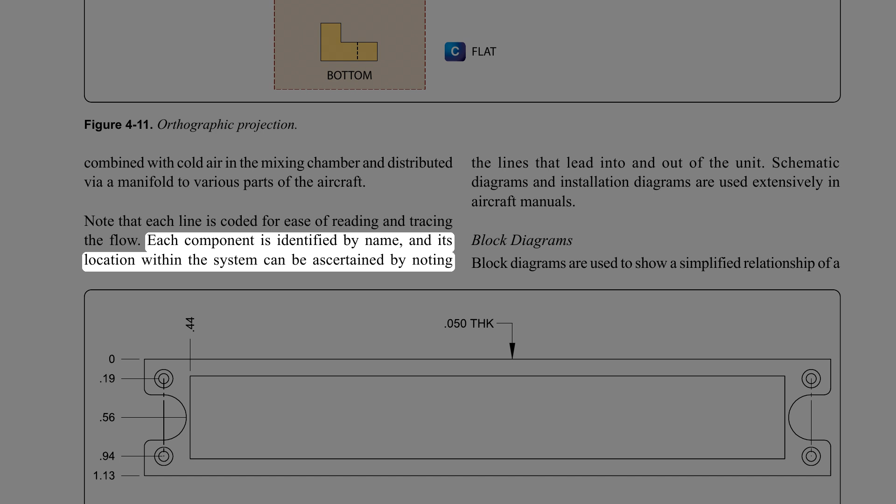Figure 4-19 illustrates a schematic diagram of an aircraft air conditioning system. Hot bleed air from the engine is combined with cold air in the mixing chamber and distributed via a manifold to various parts of the aircraft. Note that each line is coded for ease of reading and tracing the flow. Each component is identified by name, and its location within the system can be ascertained by noting the lines that lead into and out of the unit. Schematic diagrams and installation diagrams are used extensively in aircraft manuals.

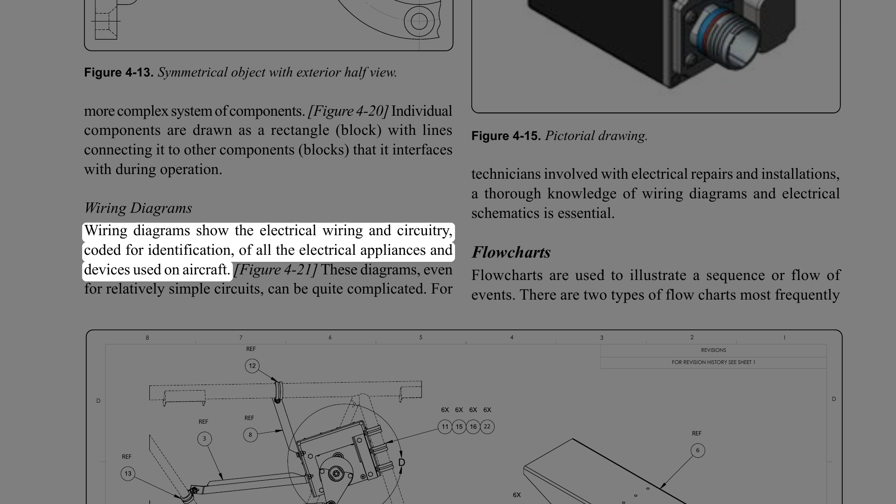Block diagrams. Block diagrams are used to show a simplified relationship of a more complex system of components. Individual components are drawn as a rectangle, block, with lines connecting it to other components, blocks, that it interfaces with during operation. Wiring diagrams. Wiring diagrams show the electrical wiring and circuitry, coded for identification, of all the electrical appliances and devices used on aircraft. These diagrams, even for relatively simple circuits, can be quite complicated. For technicians involved with electrical repairs and installations, a thorough knowledge of wiring diagrams and electrical schematics is essential.

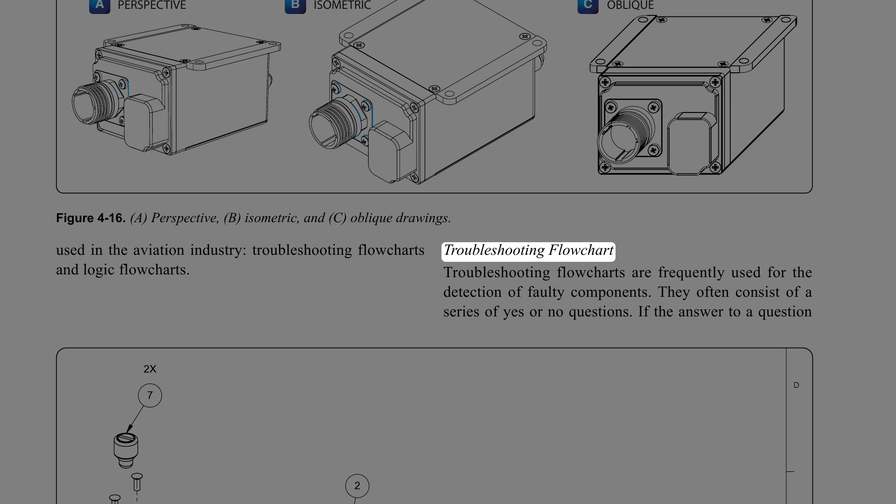Flowcharts. Flowcharts are used to illustrate a sequence or flow of events. There are 2 types of flowcharts most frequently used in the aviation industry: troubleshooting flowcharts and logic flowcharts. Troubleshooting flowchart. Troubleshooting flowcharts are frequently used for the detection of faulty components. They often consist of a series of yes or no questions. If the answer to a question is yes, one course of action is followed. If the answer is no, a different course of action is followed. In this simple manner, a logical solution to a problem may be achieved. Figure 4-22 shows a flowchart to determine the repair options for a composite structure.

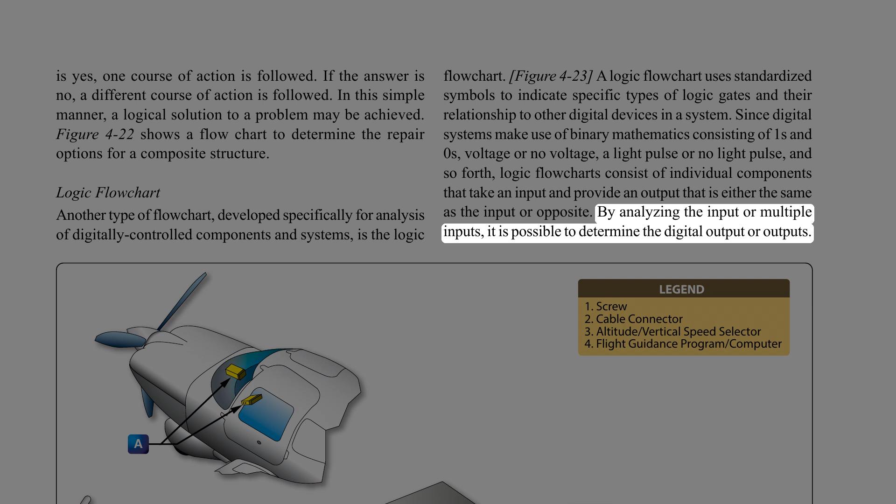Logic flowchart. Another type of flowchart, developed specifically for analysis of digitally controlled components and systems, is the logic flowchart. A logic flowchart uses standardized symbols to indicate specific types of logic gates and their relationship to other digital devices in a system. Since digital systems make use of binary mathematics consisting of ones and zeros, voltage or no voltage, a light pulse or no light pulse, and so forth, logic flowcharts consist of individual components that take an input and provide an output that is either the same as the input or opposite. By analyzing the input or multiple inputs, it is possible to determine the digital output or outputs.

Lines and their meanings. Every drawing is composed of lines. Lines mark the boundaries, edges, and intersection of surfaces. Lines are used to show dimensions and hidden surfaces and to indicate centers. Obviously, if the same kind of line is used to show these variations, a drawing becomes a meaningless collection of lines. For this reason, various kinds of standardized lines are used on aircraft drawings. Examples of correct line uses are shown in Figure 4-25. Most drawings use 3 widths, or intensities, of lines: thin, medium, or thick. These lines may vary somewhat on different drawings, but there is a noticeable difference between a thin and a thick line, with the width of the medium line somewhere between the two.

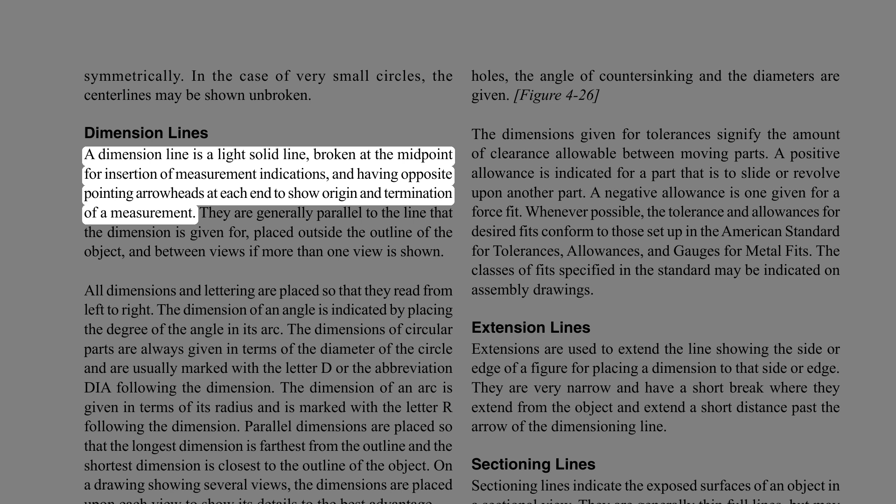Centerlines. Centerlines are made up of alternate long and short dashes. They indicate the center of an object or part of an object. Where centerlines cross, the short dashes intersect symmetrically. In the case of very small circles, the center lines may be shown unbroken. Dimension lines. A dimension line is a light solid line, broken at the midpoint for insertion of measurement indications, and having opposite pointing arrowheads at each end to show origin and termination of a measurement.

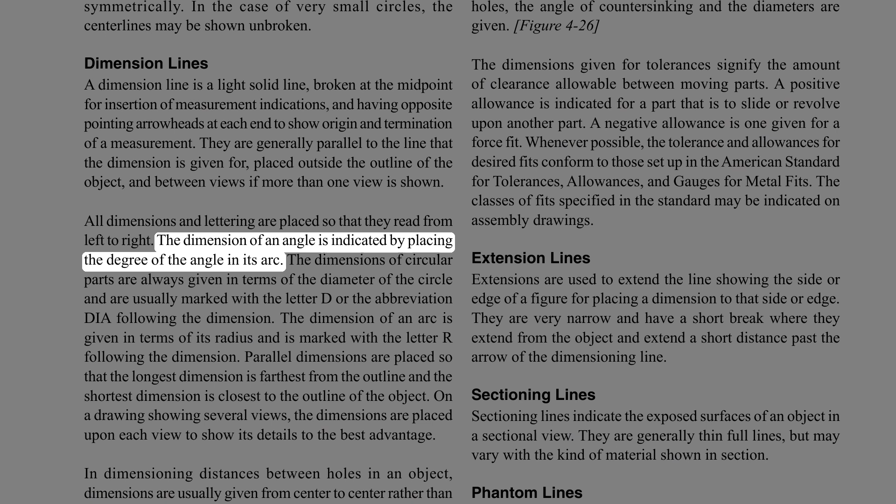They are generally parallel to the line that the dimension is given for, placed outside the outline of the object, and between views if more than one view is shown. All dimensions and lettering are placed so that they read from left to right. The dimension of an angle is indicated by placing the degree of the angle in its arc.

The dimensions of circular parts are always given in terms of the diameter of the circle and are usually marked with the letter D or the abbreviation dia following the dimension. The dimension of an arc is given in terms of its radius and is marked with the letter R following the dimension. Parallel dimensions are placed so that the longest dimension is farthest from the outline and the shortest dimension is closest to the outline of the object.

On a drawing showing several views, the dimensions are placed upon each view to show its details to the best advantage. In dimensioning distances between holes in an object, dimensions are usually given from center to center rather than from outside to outside of the holes. When several holes of various sizes are shown, the desired diameters are given on a leader followed by notes indicating the machining operations for each hole.

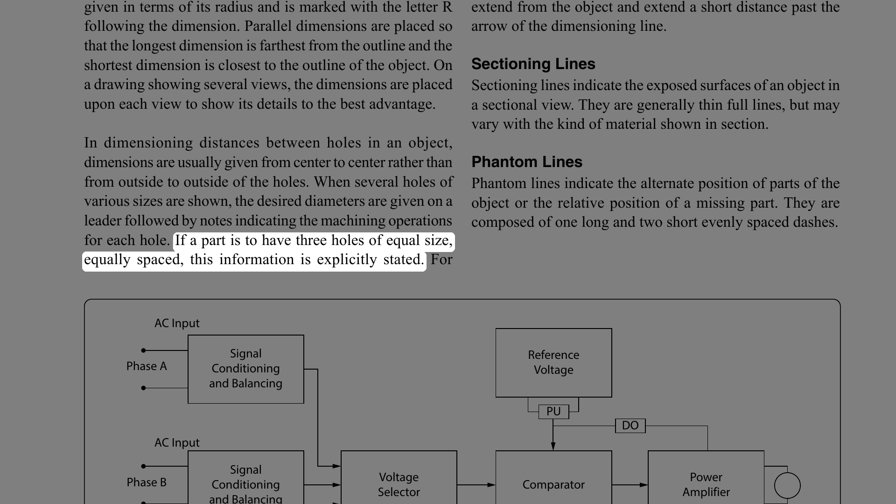If a part is to have 3 holes of equal size, equally spaced, this information is explicitly stated. For countersunk holes, the angle of countersinking and the diameters are given. The dimensions given for tolerances signify the amount of clearance allowable between moving parts. A positive allowance is indicated for a part that is to slide or revolve upon another part. A negative allowance is one given for a force fit.

Whenever possible, the tolerance and allowances for desired fits conform to those set up in the American Standard for tolerances, allowances, and gauges for metal fits. The classes of fits specified in the standard may be indicated on assembly drawings. Extension lines. Extensions are used to extend the line showing the side or edge of a figure for placing a dimension to that side or edge. They are very narrow and have a short break where they extend from the object and extend a short distance past the arrow of the dimensioning line.

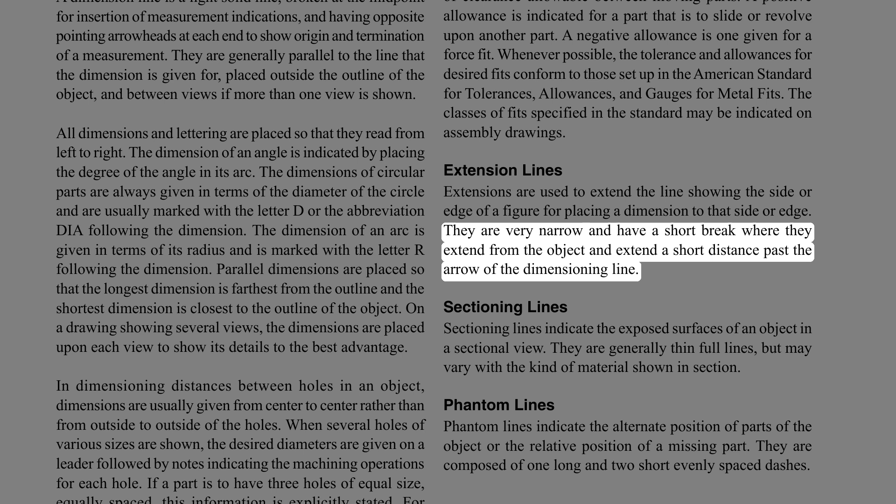Sectioning lines. Sectioning lines indicate the exposed surfaces of an object in a sectional view. They are generally thin full lines, but may vary with the kind of material shown in section. Phantom lines. Phantom lines indicate the alternate position of parts of the object or the relative position of a missing part. They are composed of 1 long and 2 short evenly spaced dashes. Precision work. Sizes are given in decimals. Diameters and depths are given for counterbore holes.

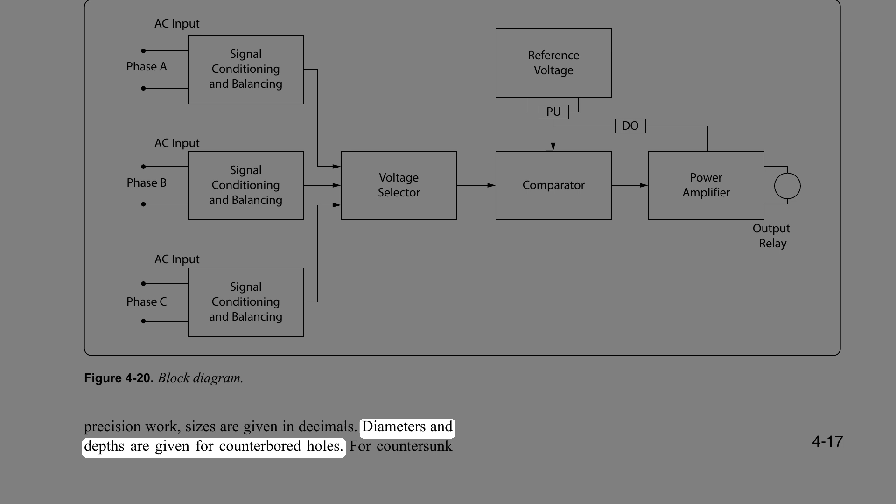For countersunk. Break lines. Break lines indicate that a portion of the object is not shown on the drawing. Short breaks are made by solid, freehand lines. For long breaks, solid ruled lines with zigzags are used. Shafts, rods, tubes, and other such parts that have a portion of their length broken out have the ends of the break drawn as indicated in Figure 4-25. Leader lines. Leader lines are solid lines with 1 arrowhead. They indicate a part or portion that a note, number, or other reference applies.

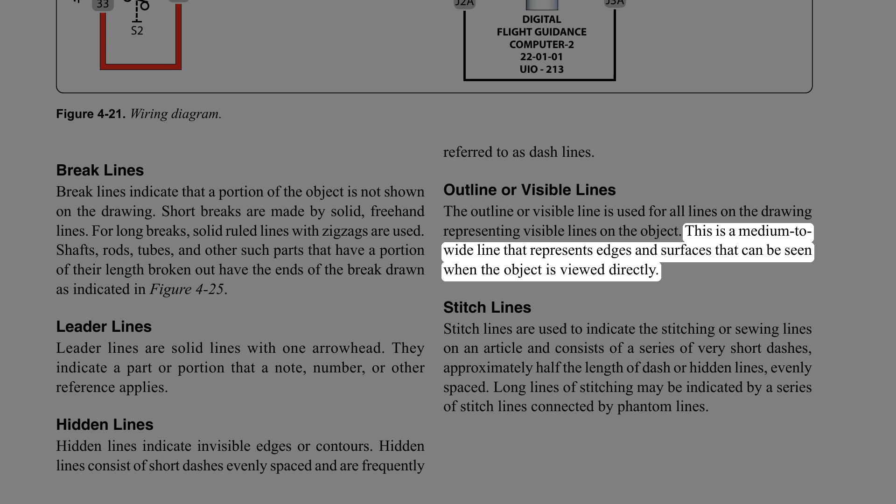Hidden lines. Hidden lines indicate invisible edges or contours. Hidden lines consist of short dashes evenly spaced and are frequently referred to as dash lines. Outline or visible lines. The outline or visible line is used for all lines on the drawing representing visible lines on the object. This is a medium to wide line that represents edges and surfaces that can be seen when the object is viewed directly.

Stitch lines. Stitch lines are used to indicate the stitching or sewing lines on an article and consist of a series of very short dashes, approximately half the length of dash of hidden lines, evenly spaced. Long lines of stitching may be indicated by a series of stitch lines connected by phantom lines. Cutting plane and viewing plane lines. Cutting plane lines indicate the plane where a sectional view of the object is taken. In Figure 4-25, plane line A indicates the plane that section AA is taken. Viewing plane lines indicate the plane from where a surface is viewed.

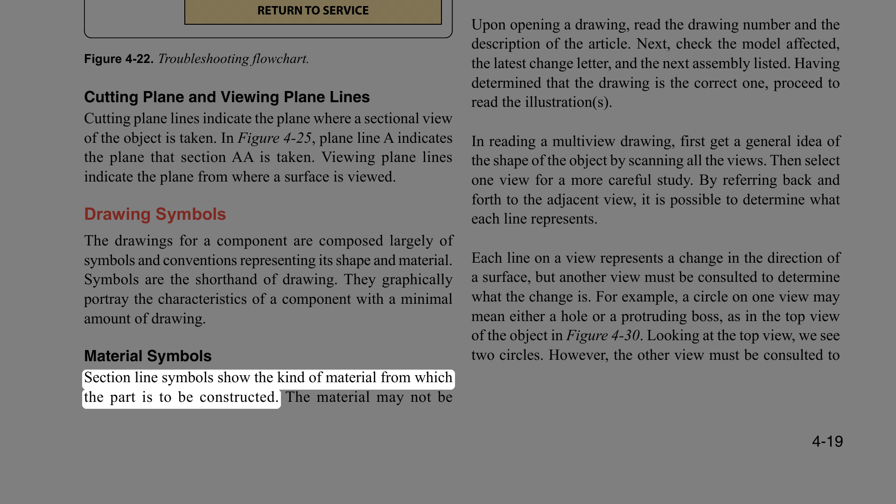Drawing symbols. The drawings for a component are composed largely of symbols and conventions representing its shape and material. Symbols are the shorthand of drawing. They graphically portray the characteristics of a component with a minimal amount of drawing. Material symbols. Section line symbols show the kind of material from which the part is to be constructed. The material may not be indicated symbolically if its exact specification is shown elsewhere on the drawing.

In this case, the more easily drawn symbol for cast iron is used for the sectioning, and the material specification is listed in the bill of materials or indicated in a note. Figure 4-27 illustrates a few standard material symbols. Shape symbols. Symbols can be used to excellent advantage when needed to show the shape of an object.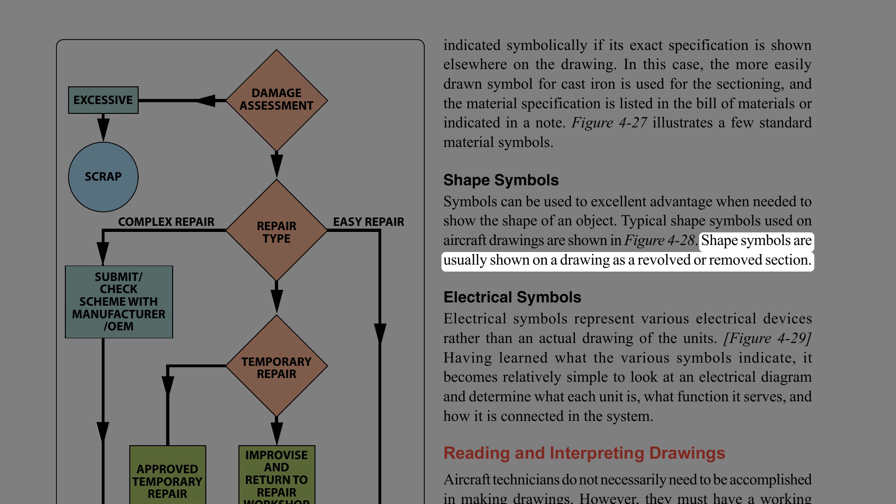Typical shape symbols used on aircraft drawings are shown in Figure 4-28. Shape symbols are usually shown on a drawing as a revolved or removed section.

Electrical symbols. Electrical symbols represent various electrical devices rather than an actual drawing of the units. Having learned what the various symbols indicate, it becomes relatively simple to look at an electrical diagram and determine what each unit is, what function it serves, and how it is connected in the system.

Reading and interpreting drawings. Aircraft technicians do not necessarily need to be accomplished in making drawings. However, they must have a working knowledge of the information that is to be conveyed to them. They most frequently encounter drawings for construction and assembly of new aircraft and components, during modifications, and for making repairs.

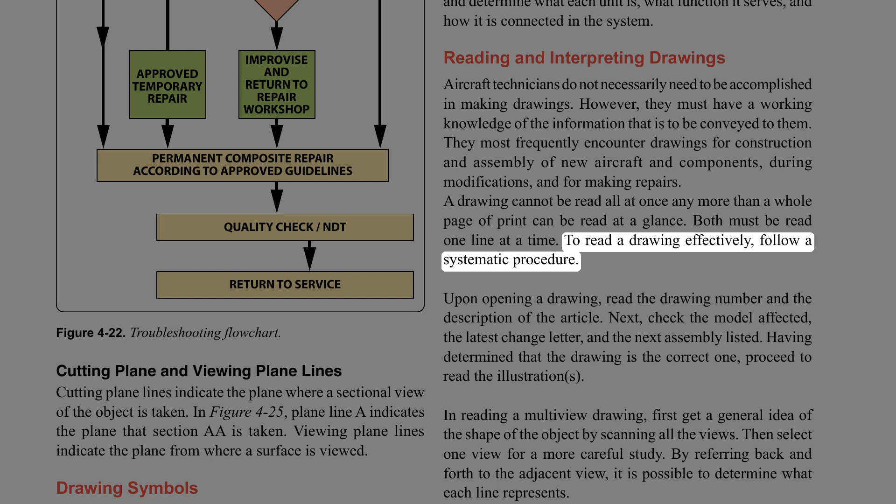A drawing cannot be read all at once any more than a whole page of print can be read at a glance. Both must be read one line at a time. To read a drawing effectively, follow a systematic procedure. Upon opening a drawing, read the drawing number and the description of the article. Next, check the model affected, the latest change letter, and the next assembly listed. Having determined that the drawing is the correct one, proceed to read the illustrations.

In reading a multi-view drawing, first get a general idea of the shape of the object by scanning all the views. Then select one view for a more careful study. By referring back and forth to the adjacent view, it is possible to determine what each line represents. Each line on a view represents a change in the direction of a surface, but another view must be consulted to determine what the change is.

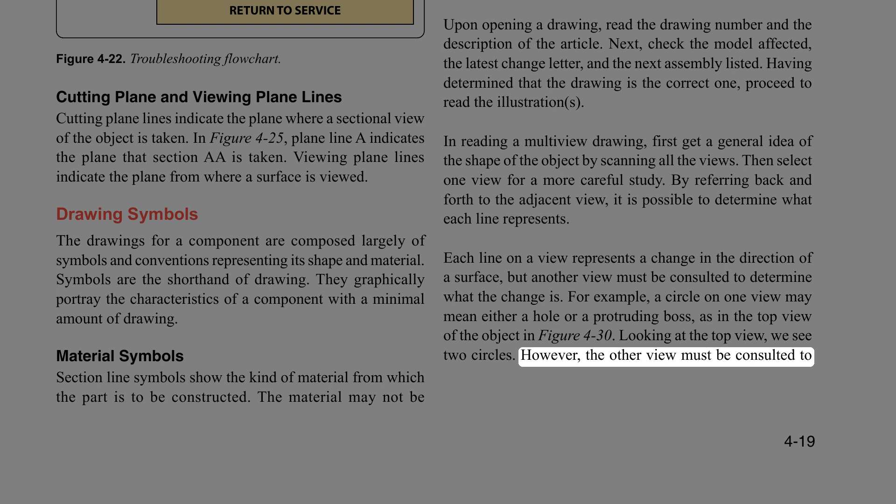For example, a circle on one view may mean either a hole or a protruding boss, as in the top view of the object in Figure 4-30. Looking at the top view, we see two circles. However, the other view must be consulted to determine what each circle represents. A glance at the other view tells us that the smaller circle represents a hole, and the larger circle represents a protruding boss. In the same way, the top view must be consulted to determine the shape of the hole and the protruding boss.

It can be seen from this example that one cannot read a print by looking at a single view when more than one view is given. Two views do not always describe an object, and when three views are given, all three must be consulted to be sure the shape has been read correctly.

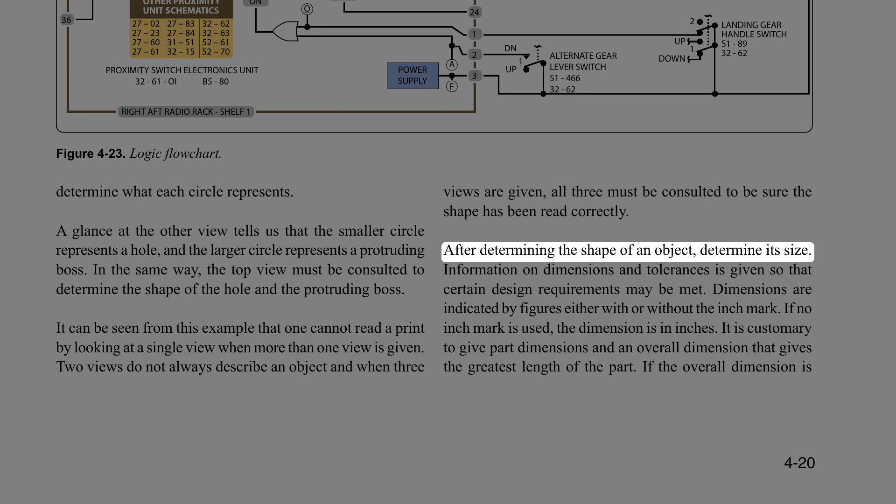After determining the shape of an object, determine its size. Information on dimensions and tolerances is given so that certain design requirements may be met. Dimensions are indicated by figures either with or without the inch mark. If no inch mark is used, the dimension is in inches. It is customary to give part dimensions and an overall dimension that gives the greatest length of the part. If the overall dimension is missing, it can be determined by adding the separate part dimensions.

Many drawings used for new aircraft and components are now using the metric system, and millimeter is the unit used for these drawings. Drawings may be dimensioned in decimals or fractions. This is especially true about tolerances. Instead of using plus and minus signs for tolerances, many figures give the complete dimension for both tolerances. For example, if a dimension is 2 inches with a plus or minus tolerance of 0.01, the drawing would show the total dimensions.

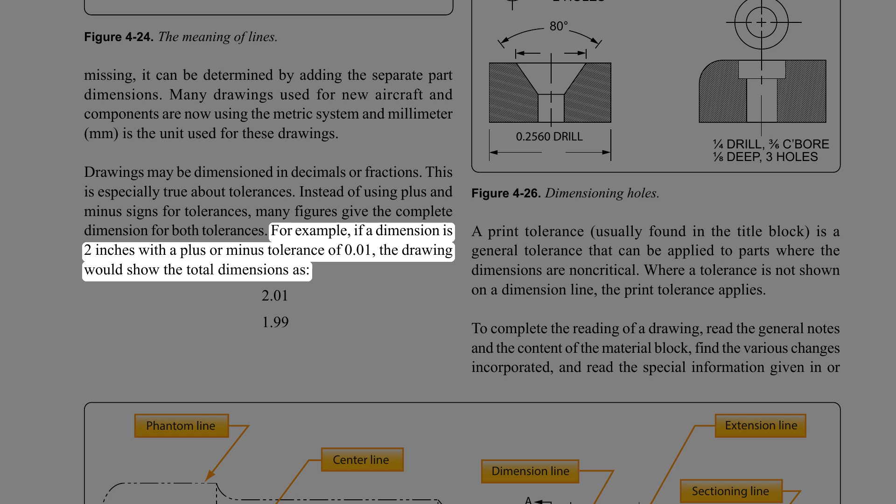A print tolerance, usually found in the title block, is a general tolerance that can be applied to parts where the dimensions are non-critical. Where a tolerance is not shown on a dimension line, the print tolerance applies. To complete the reading of a drawing, read the general notes and the content of the material block, find the various changes incorporated, and read the special information given in or near views and sections.

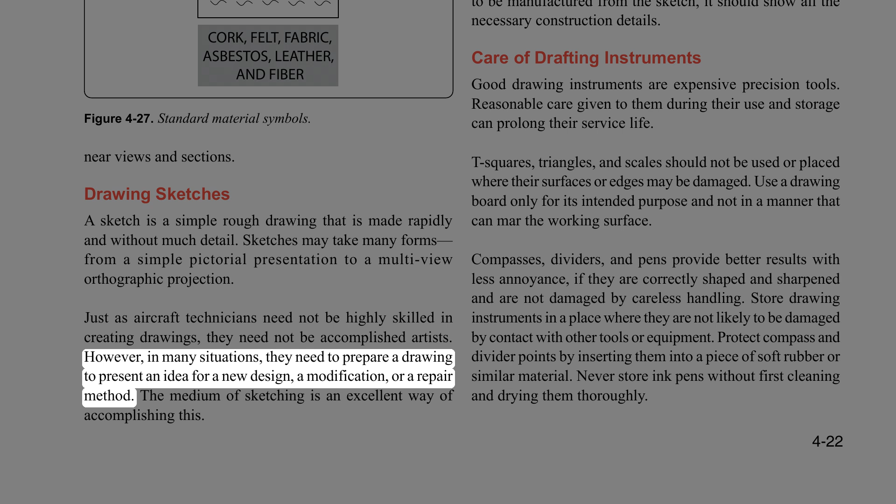Drawing sketches. A sketch is a simple rough drawing that is made rapidly and without much detail. Sketches may take many forms, from a simple pictorial presentation to a multi-view orthographic projection. Just as aircraft technicians need not be highly skilled in creating drawings, they need not be accomplished artists. However, in many situations, they need to prepare a drawing to present an idea for a new design, a modification, or a repair method. The medium of sketching is an excellent way of accomplishing this.

The rules and conventional practices for making mechanical drawings are followed to the extent that all views needed to portray an object accurately are shown in their proper relationship. It is also necessary to observe the rules for correct line use and dimensioning. Figures 4-24 and 4-25.

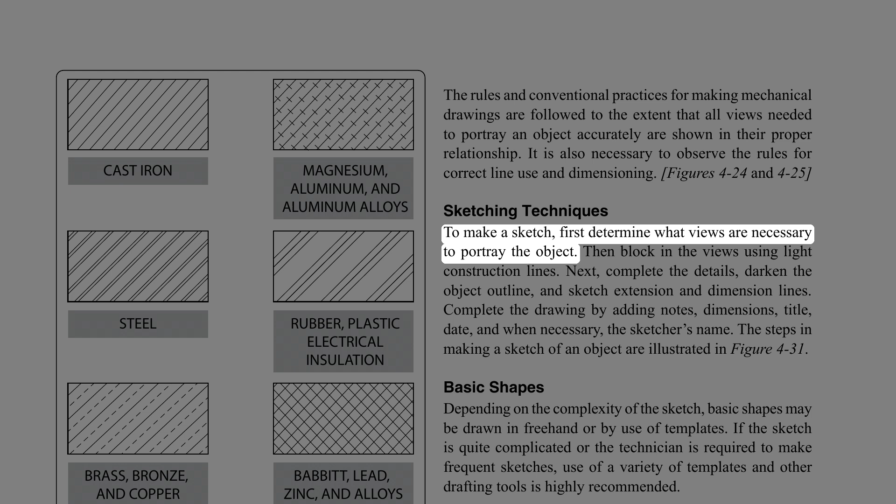Sketching techniques. To make a sketch, first determine what views are necessary to portray the object. Then block in the views using light construction lines. Next, complete the details, darken the object outline, and sketch extension and dimension lines.

Complete the drawing by adding notes, dimensions, title, date, and when necessary, the sketcher's name. The steps in making a sketch of an object are illustrated in Figure 4-31.

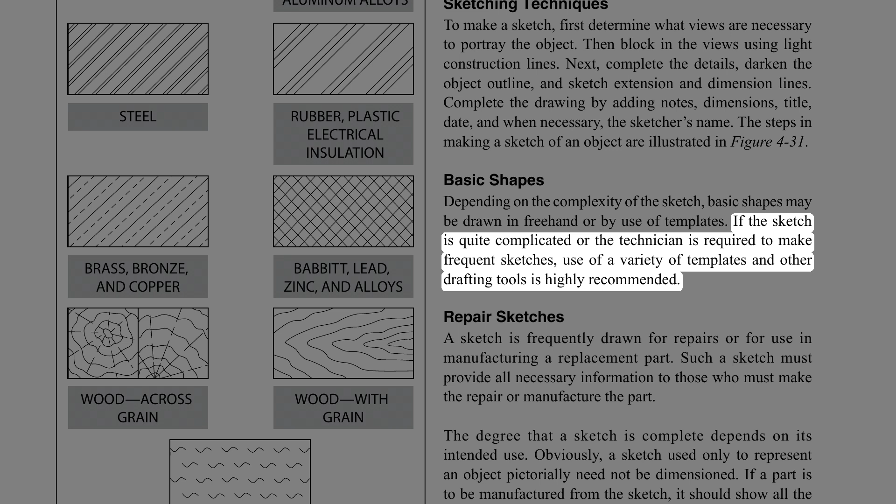Basic shapes. Depending on the complexity of the sketch, basic shapes may be drawn freehand or by use of templates. If the sketch is quite complicated or the technician is required to make frequent sketches, use of a variety of templates and other drafting tools is highly recommended.

Repair sketches. A sketch is frequently drawn for repairs or for use in manufacturing a replacement part. Such a sketch must provide all necessary information to those who must make the repair or manufacture the part. The degree that a sketch is complete depends on its intended use. Obviously, a sketch used only to represent an object pictorially need not be dimensioned. If a part is to be manufactured from the sketch, it should show all the necessary construction details.

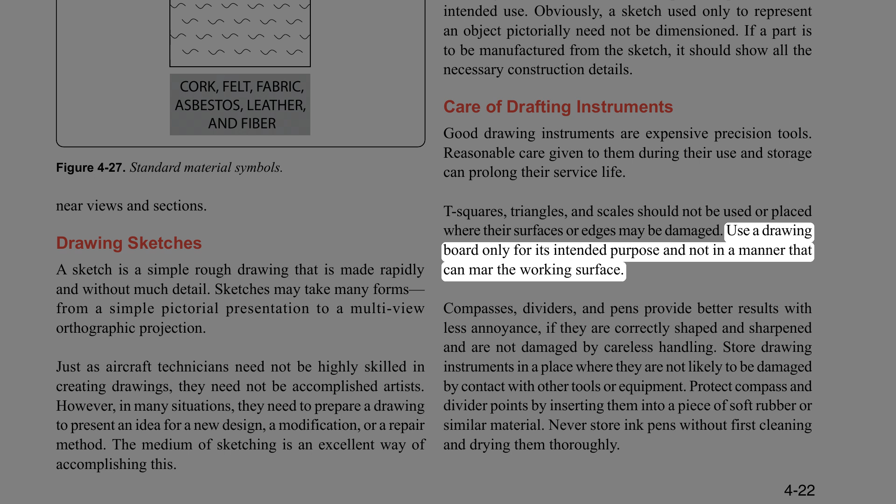Care of drafting instruments. Good drawing instruments are expensive precision tools. Reasonable care given to them during their use and storage can prolong their service life. T-squares, triangles, and scales should not be used or placed where their surfaces or edges may be damaged. Use a drawing board only for its intended purpose and not in a manner that can mar the working surface.

Compasses, dividers, and pens provide better results with less annoyance if they are correctly shaped and sharpened and are not damaged by careless handling. Store drawing instruments in a place where they are not likely to be damaged by contact with other tools or equipment. Protect compass and divider points by inserting them into a piece of soft rubber or similar material. Never store ink pens without first cleaning and drying them thoroughly.

Graphs and charts. Graphs and charts are frequently used to convey information graphically or information given certain conditions. They often utilize values shown on the x and y axes that can be projected up and across to arrive at a specific result. Also, when data is entered into a computer database, software programs can create a variety of different bar graphs, pie charts, and so forth to graphically represent that data.

Reading and interpreting graphs and charts. When interpreting information shown on graphs and charts, it is extremely important that all the notes and legend information be carefully understood to eliminate any misinterpretation of the information presented.

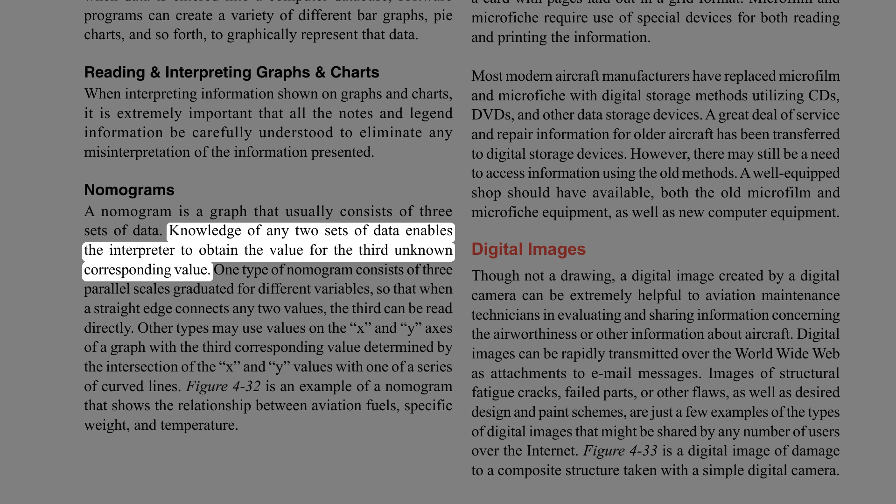Nomograms. A nomogram is a graph that usually consists of 3 sets of data. Knowledge of any 2 sets of data enables the interpreter to obtain the value for the third unknown corresponding value. One type of nomogram consists of 3 parallel scales graduated for different variables, so that when a straight edge connects any 2 values, the third can be read directly.

Other types may use values on the x and y axes of a graph with the third corresponding value determined by the intersection of the x and y values with one of a series of curved lines. Figure 4-32 is an example of a nomogram that shows the relationship between aviation fuels, specific weight, and temperature.

Microfilm and microfiche. The practice of recording drawings, parts catalogs, and maintenance and overhaul manuals on microfilm was utilized extensively in the past. Microfilm is available as regular 16mm or 35mm film. Since 35mm film is larger, it provides a better reproduction of drawings. Microfiche is a card with pages laid out in a grid format. Microfilm and microfiche require use of special devices for both reading and printing the information.

Most modern aircraft manufacturers have replaced microfilm and microfiche with digital storage methods utilizing CDs, DVDs, and other data storage devices. A great deal of service and repair information for older aircraft has been transferred to digital storage devices. However, there may still be a need to access information using the old methods. A well-equipped shop should have available both the old microfilm and microfiche equipment, as well as new computer equipment.

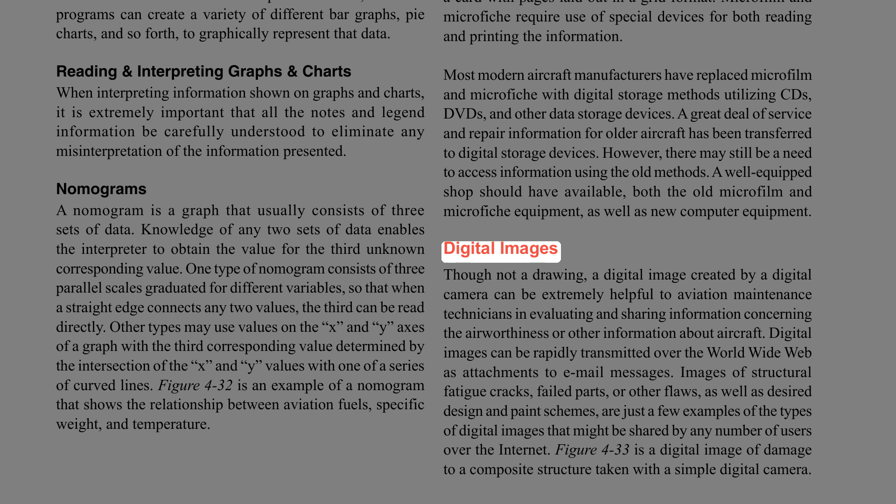Digital images. Though not a drawing, a digital image created by a digital camera can be extremely helpful to aviation maintenance technicians in evaluating and sharing information concerning the airworthiness or other information about aircraft. Digital images can be rapidly transmitted over the World Wide Web as attachments to email messages. Images of structural fatigue cracks, failed parts, or other flaws, as well as desired design and paint schemes, are just a few examples of the types of digital images that might be shared by any number of users over the internet. Figure 4-33 is a digital image of damage to a composite structure taken with a simple digital camera.